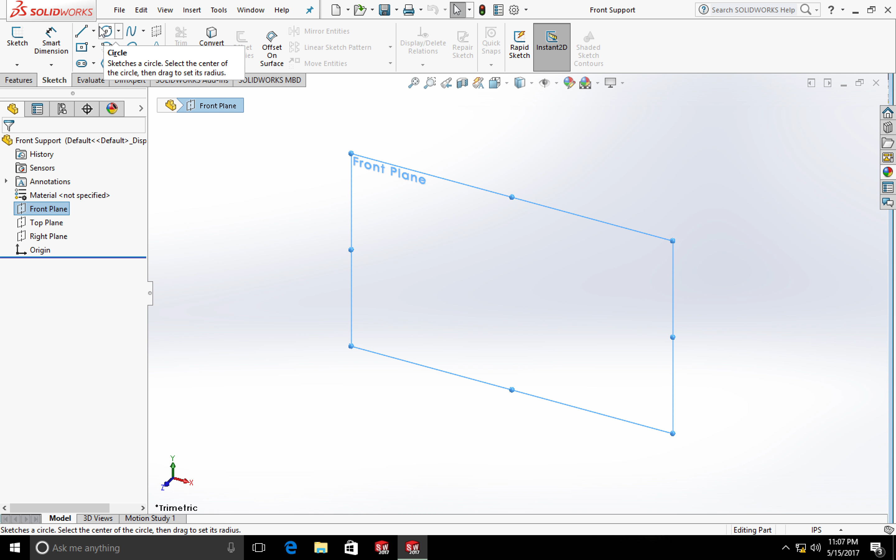So I'm going to go to Sketch. I'm going to make a center line. Now, part of great design is actually laziness. Now, I myself am a very lazy person, meaning that if I can get away with only doing something once instead of twice, I will do it. I will take a shortcut every time. So we're going to go ahead and do that just now.

Let's see here. Now, I'm not going to look at that. Well, bear with me. My scroll wheel acts differently on this computer than something I am accustomed to, and it has a tendency to run my way. So don't get too mad at me, it's just my scroll wheel acting up. All right, we're going to create that basic frame.

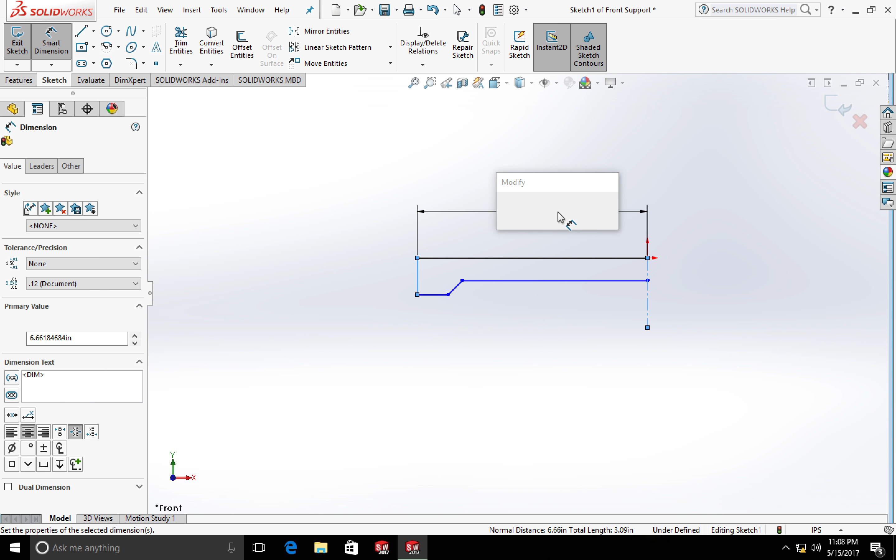Now what we're looking at right here is basically the front of the machine. We decided that with this machine we're going to have approximately a 2 foot by 2 foot cutting area. So I think for an early estimate, we're going to shoot for 32 inches total. Now, we're only building half of it right now, so we're actually going to go 32 divided by 2. And boom, there we have 16 inches.

I'm envisioning this being about, whoops, that's not, there we go, about probably 4 inches high. Yeah, it's just about right. We're having a little step up right here, no real reason for it, but let's go about 1 point... well, nah, I changed my mind a lot. We're going to go down to 1 right here.

Let's say about 4 inches right there. And that's fine. And then let's just go ahead and make this a 45-degree angle. Oop, it's balking at me there. There we go.

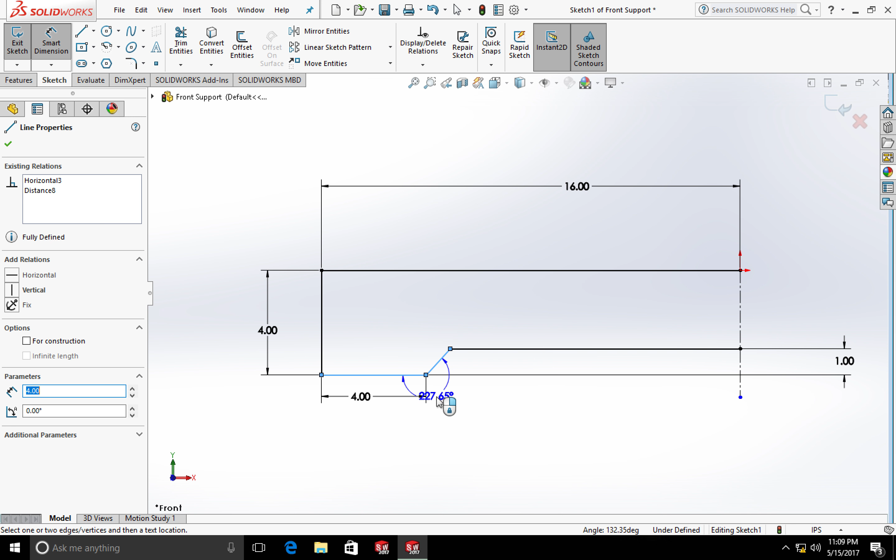Now I gotta do math. What is that? Okay, watch Alex. 120 degrees, is that right? Is that your 45? No, that's not it. It's 135, is it? Gosh, I'm getting rusty at this. Yeah, it's gotta be 135, I think. See, Alex is starting to look at me like I don't know basic angles. What do you know? Well, that's a valid point.

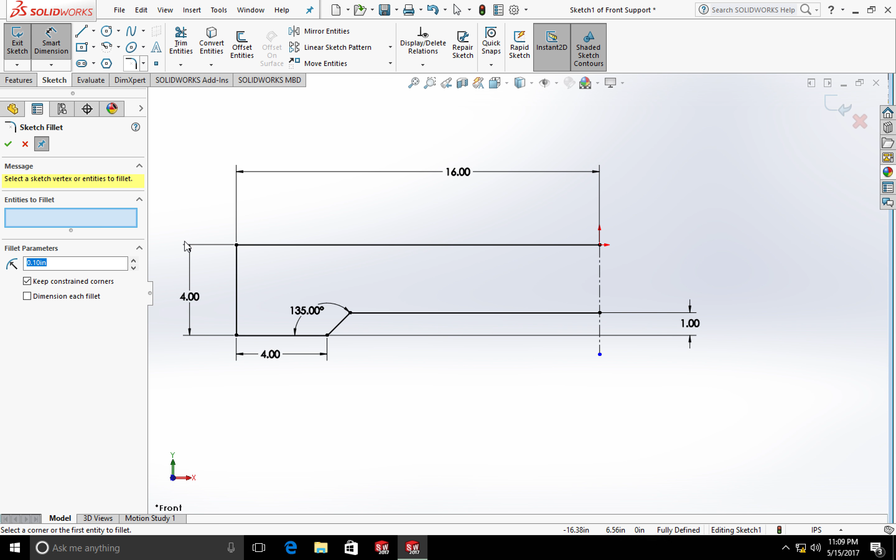Okay, anyways, there we are. This is now, keep in mind, only half the picture. Now this is completely unnecessary, but I like doing sketch fillets. I like to have a nice rounded kind of view on things, so we're going to put a half-inch fillet there and kind of make it look pretty. What can I say? I like the finer things in life.

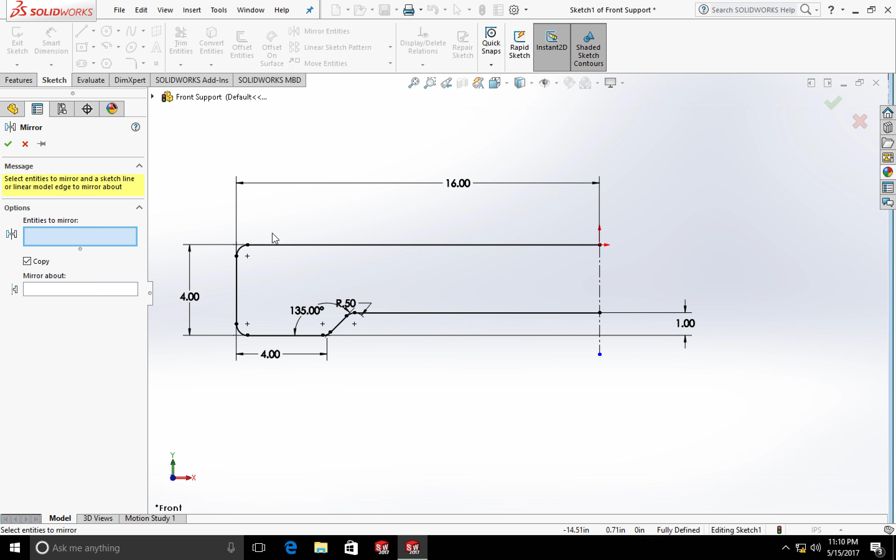All right, there is that. Now, if you remember earlier when I said I was lazy, I am. So we're going to go ahead and just copy things over. Let's make sure we get everything, and we're going to mirror it right like that. And guess what? We have our other half now. There we have our basic shape.

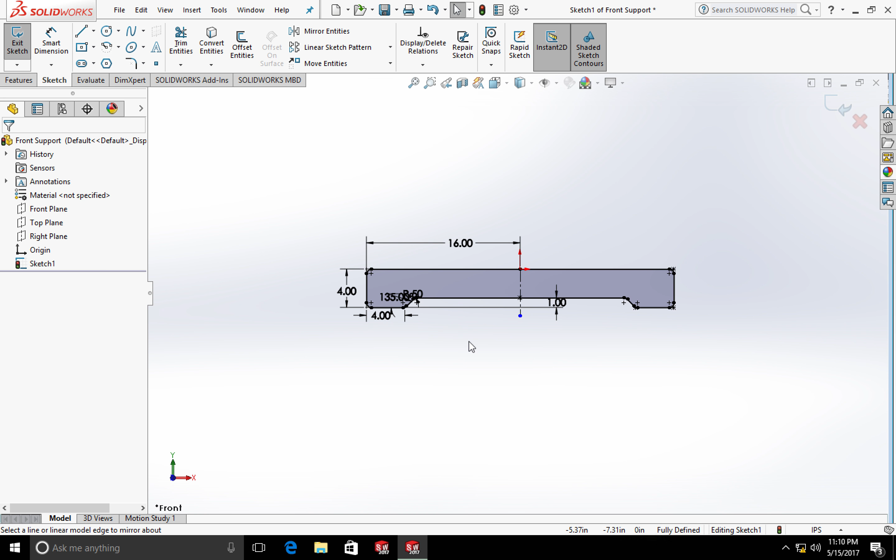There goes my scroll wheel again. We're going to exit this sketch. And guess what, there we have it. Oh no, is it true? Oh, there we go, my middle scroll wheel, my click and rotate wasn't working, and that was very distressing to me.

Okay, so we got that shape, and now we're going to go to feature, and we are going to extrude. We are going to extrude 3/4 of an inch, 0.75, and hit enter. And there is our official first part of our CNC. Aren't you excited? Isn't this great?

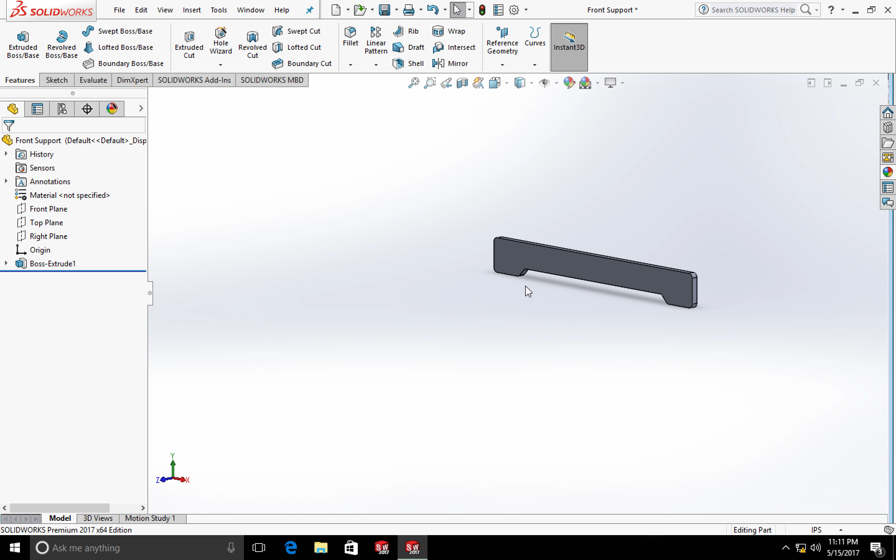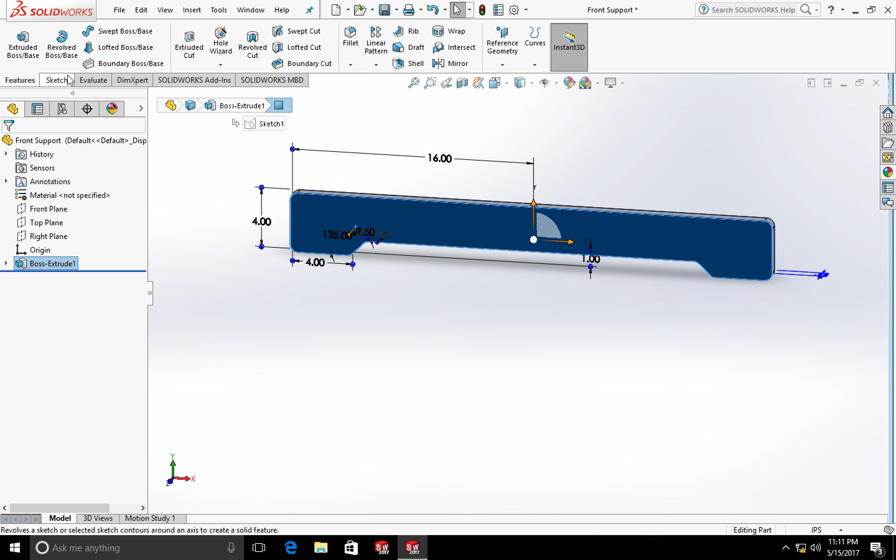Now, obviously, this part's not going to stay like this forever. Right now this has a long way to go, but that's okay. We're going to click here, go to features, and we're going to do our hole wizard. Now, where did that little thing get off to? Hole wizard, there it is, right there.

Now, I believe 80/20 - let's go back and look at our 80/20 right here. And the flavor that we're going to use is the 30/30. Let's see here, yep, 30/30. I'm going to wait for my slow internet to come. There we go, here we go.

If we look right here, we can actually get our dimensions right off of it, and I always forget these. So looks like our center spacing on these guys right here is 1.5, and if memory serves me right, these holes right here are immediately ready for a 3/8 tap. I believe that's what it is. I think it's bigger than a 1/4 inch. I think it's a 3/8 inch tap.

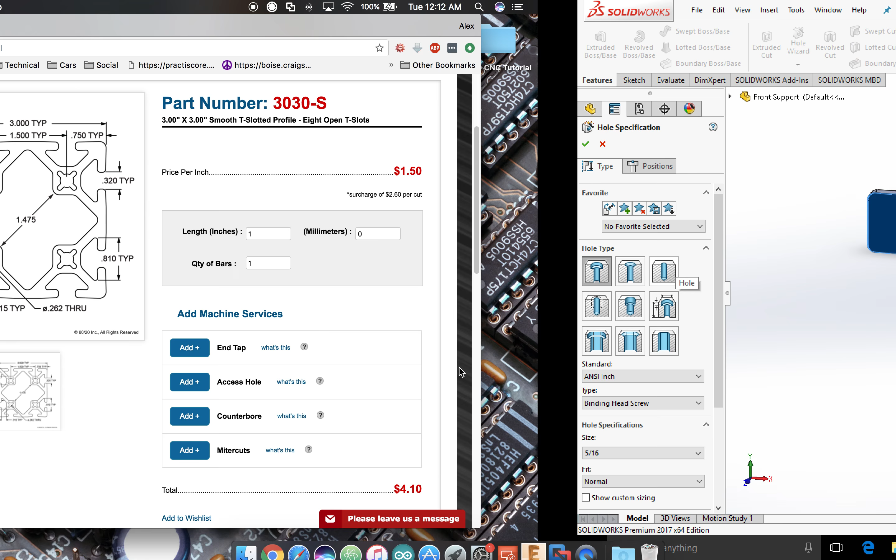So let's go ahead and make that. Okay, I was trying to remember those. That extrusion is 3x3. We're going to scroll here a little bit. So no, is it 5/16? No, 5/16, not 3/8, 5/16. Yeah, 5/16, my bad, my bad.

Okay, we're going to do a little bit of a loose fit on this one just because we want a little bit of wiggle room. I don't think we're going to need it, but just in case, if you disagree with me, you can write me some nasty hate mail. And we're going to do 1, 2, 3, and 4 of these things.

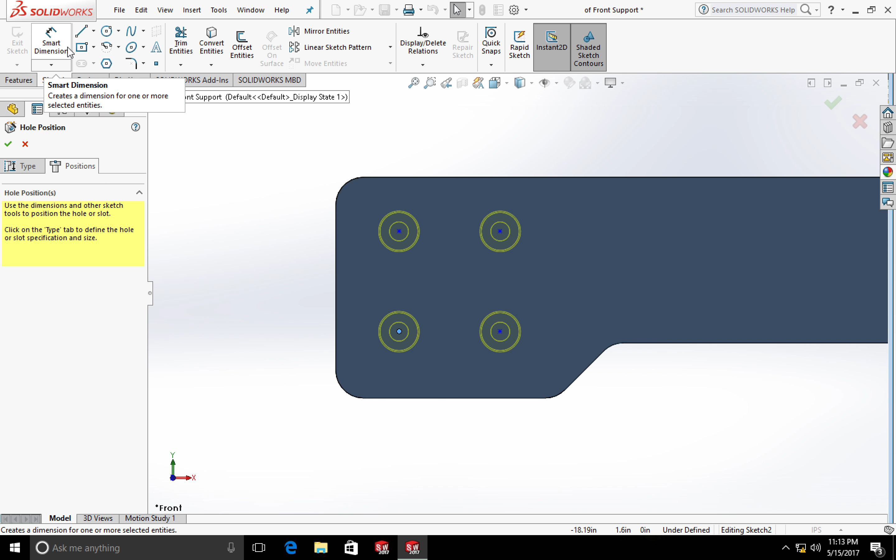Okay, let's do our front view, and we're going to zoom in a little bit. And we're going to set up some relations here. Okay, those are horizontal. These are horizontal. These are vertical. And these are vertical.

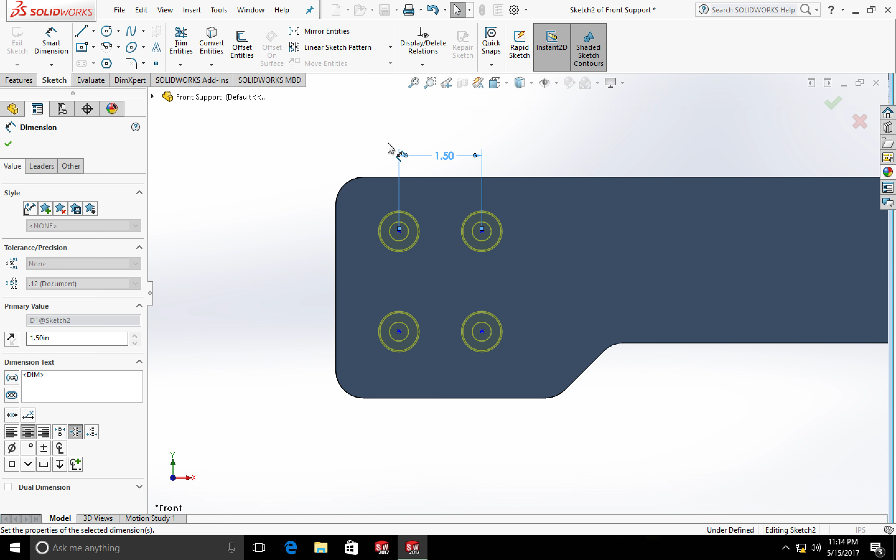Now we're going to dimension these 1.5 inches and 1.5 inches. Okay. Now we want the center of this all to be 1.5 inches from the top. Now if that's so, actually I think we can just cheat a little bit, and I believe that if we just make that 3/4 of an inch, we're going to come out okay.

Because if it's 1.5 right there, that means 3/4 in the middle. So we want it 1.5 from the top. So yeah, that should be just fine. So what that's going to do is put the top of the 80/20 right there. And likewise, I think what we want to do is put the 80/20 right there as well. Now I'm already seeing a problem with this. Okay, I forgot about that.

So we're going to move that to about 2 inches, I think, and you'll see why in a bit. We're going to have to put our screw coming out of here too, so I think we're going to need about 2 inches right there. We'll see, we might be wrong, or in fact I guarantee we'll have to change that dimension later, but for now that'll work just fine. So if we go ahead and hit OK there...

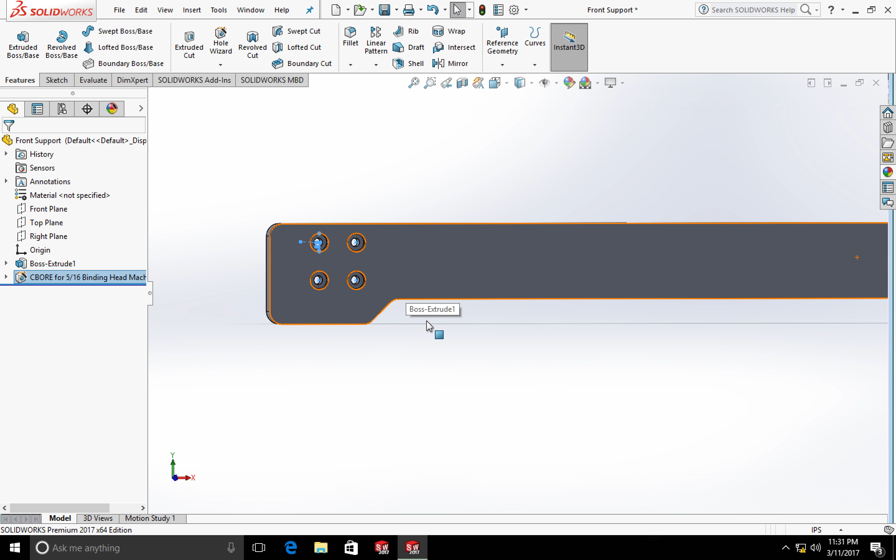There we go, we have our holes there. The hole wizard, wonderful. And oops, you know what, I forgot something, I'm gonna have to go back at that. I only did half of it because remember I'm lazy and I don't like doing things over and over again.

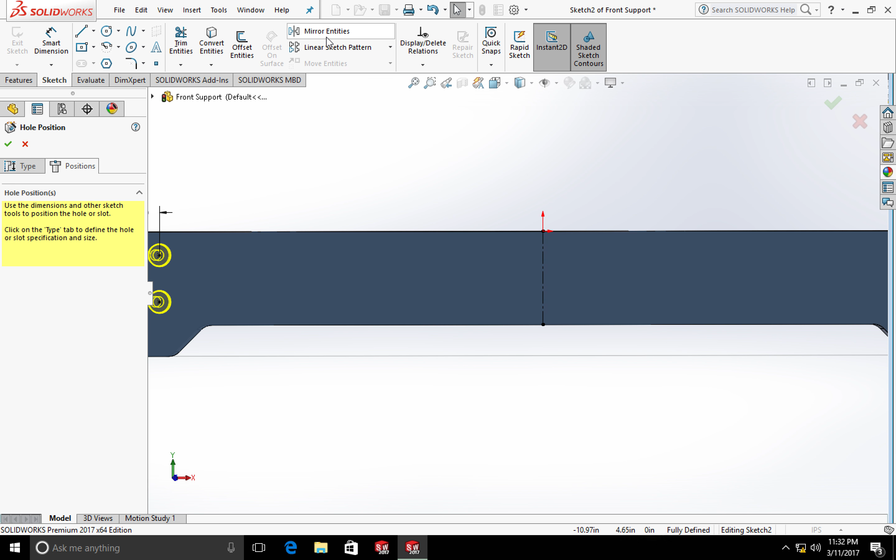I'm just gonna add a center line in here, and then I'm gonna go mirror entities, and just say what are we gonna mirror? These guys, and we're gonna mirror it about right there. Hit OK, and guess what, just like that we have holes on both sides now. Makes it really nice to be able to just do that.

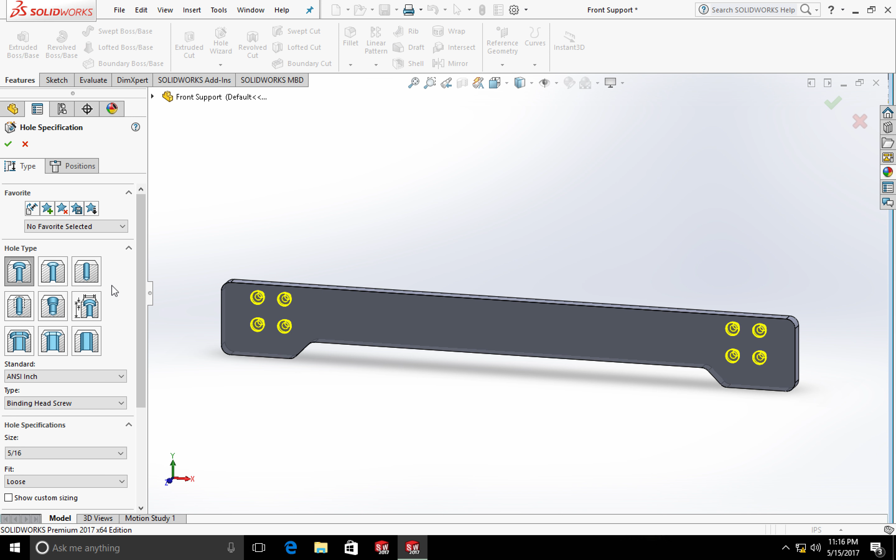So, let's say for whatever reason I come over here and decide that you know what, that's not 2 inches. Whoops, I just painted a new hole right there. Delete. Whoop. Go here, hit edit undo.

So for whatever reason, if I need to change this, let's say that we make that a 2.5 inches instead, it changes it over there too. Nope, not 25, so just 2.5. And you can see that guy over there jumps too. So if you got to edit things, you only have to edit it once, which is really nice.

I'm actually going to go ahead and leave that 2.5 here for now because we'll probably need that room over there, you'll see why in a bit. Okay, well guess what, we're going to go ahead and hit save. We have our first piece of our CNC.

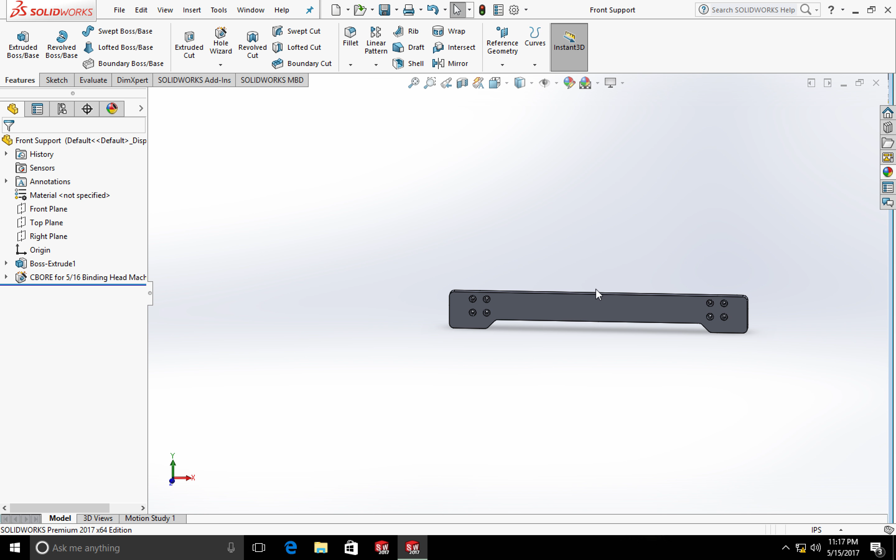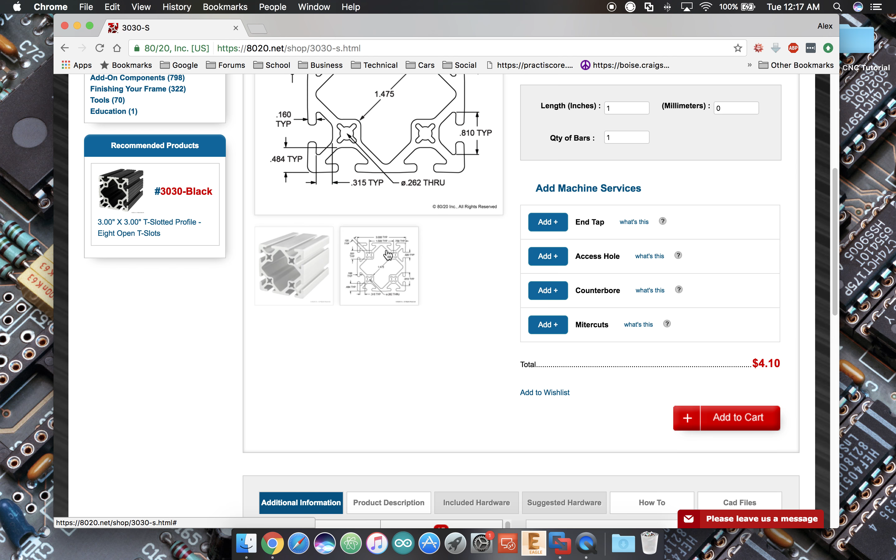Now this CNC is looking pretty sad right now. I think we're going to need to do a little bit more, and you are completely right about that. We are actually going to go ahead and add part of the frame now. Remember our frame is out of our 80/20 extrusions. Now let me ask you this, do you think we should go ahead and model this right now? Yeah, no. Do I want it in SolidWorks? Yes. Should we model that? No, right now, no. I'm going to hit CAD files, length, well, hit generate here. I don't know if it lets us do it on...

Please log in to enable download. Okay, it looks like, I wasn't planning on downloading it from this website, but it looks like you can download it right off of the 80/20 website, which is really cool. I don't know if I have a login for this, to be honest. I don't. Okay, sorry for the delay.

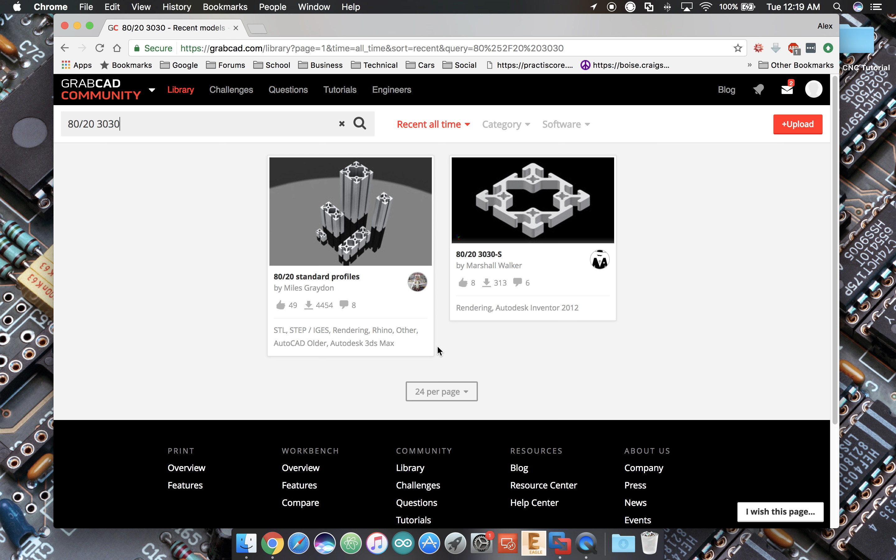We're going to go over to GrabCAD. There we go. Okay, and I'm already logged in, looks like it. And I'm going to type in 8020 3030. And let's see if we can get, you know what, I lied again, we're not going to get this from GrabCAD.

We're going to get it from 3D Content Central. And 3D Content Central is actually SolidWorks only, so they only do SolidWorks type stuff. So we're going to do 8020 3030. My main point is I've just shown you 3 different places where you can get stuff, and that don't model something if you don't have to. It's very easy to go and get a lot of this stuff right from the website.

Let's see here, so I'm going to configure and download. Okay, looks like login. Okay, now you know my email address. Please do not email me. Just don't.

Let's go and do a custom length here, and let's say 32 inches. There we go. All right, and we're going to download the 3030. And if I click on that, yeah, it is going to open it right here for us.

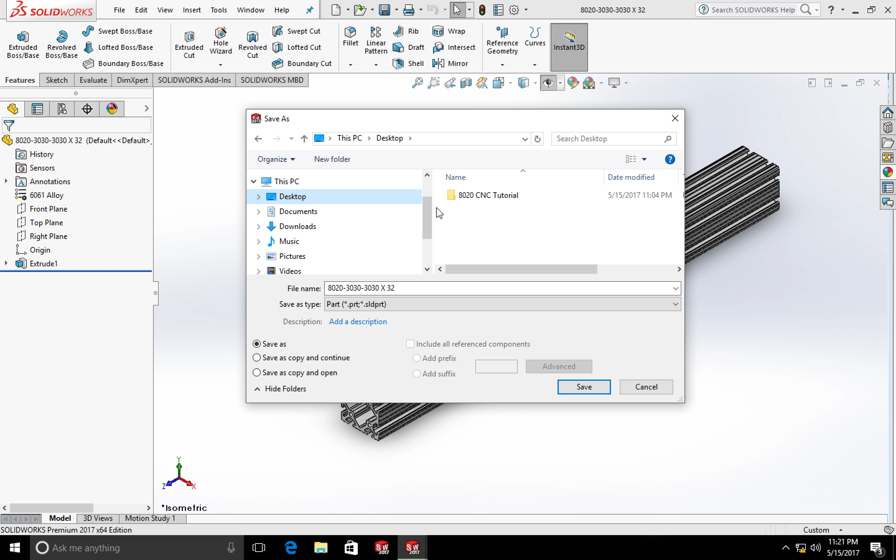What I am actually going to do is go to File, Save As, and it's in our Downloads folder, but I'm just going to go ahead and save a copy into our work folder right here, just to make it simple, because we might want to reference it later. So there we go, we have it in there.

All right, so we have our 8020, I'll go ahead and close that. We have our front support. It's time to start putting stuff together, so we're going to go to New, and this time we're going to create an assembly.

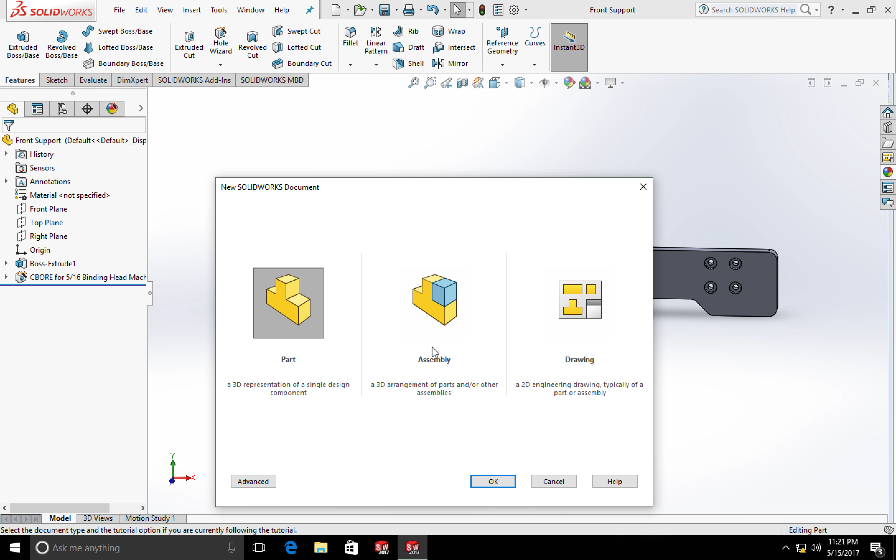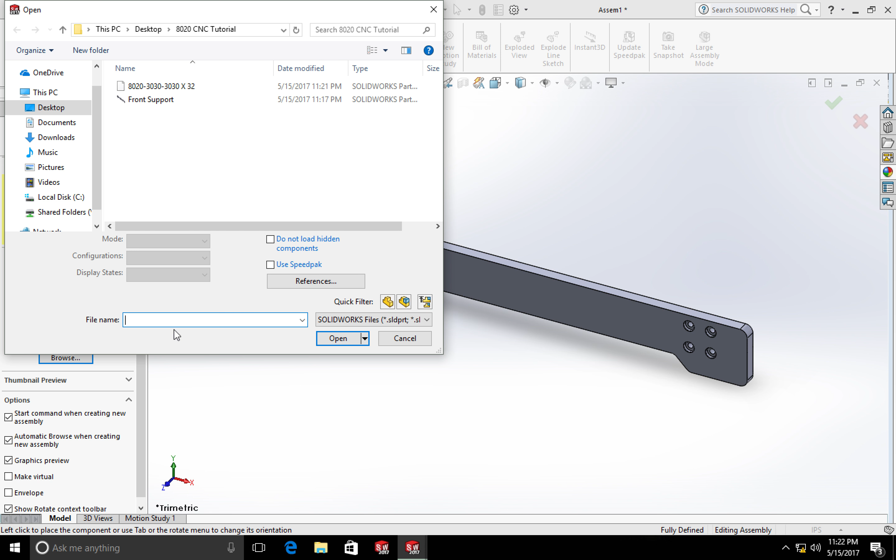Okay, now it's blank again, so we're going to take our front support and put that in there. Now we're going to insert, browse, and put our piece of 3030 in there. Boom, just like that.

Now this is the fun part. We're going to actually mate all of these together. So we're going to hit there, and we're going to mate. Whoops, my scroll button is always acting funny.

So what I did is I mated this surface right here. Oops, we don't want to do that one again, I'll clear that. To the other surface, to the opposite corner over there.

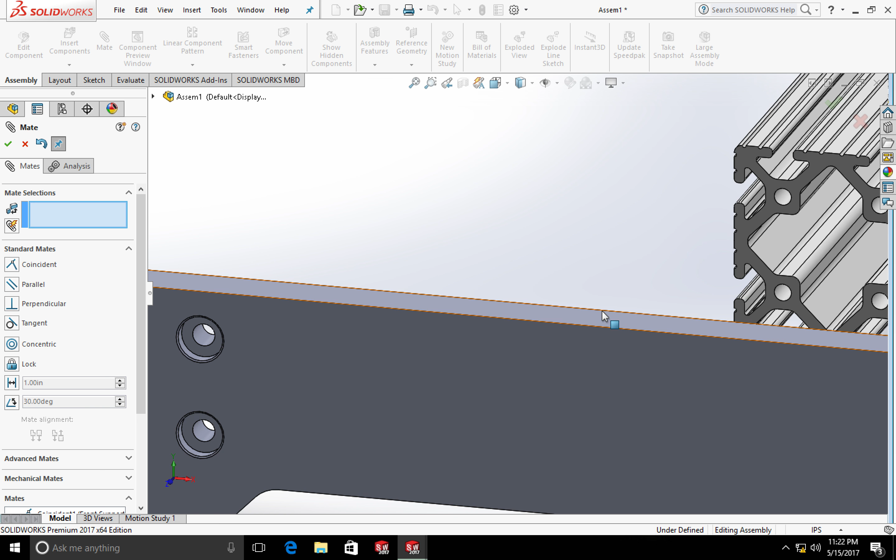Now what we're going to do is actually do our mates the same way these will be physically connected. So we'll mate that right there into that right there, and we'll mate here to here. The reason I'm doing that one is before it would rotate, but now it will not rotate.

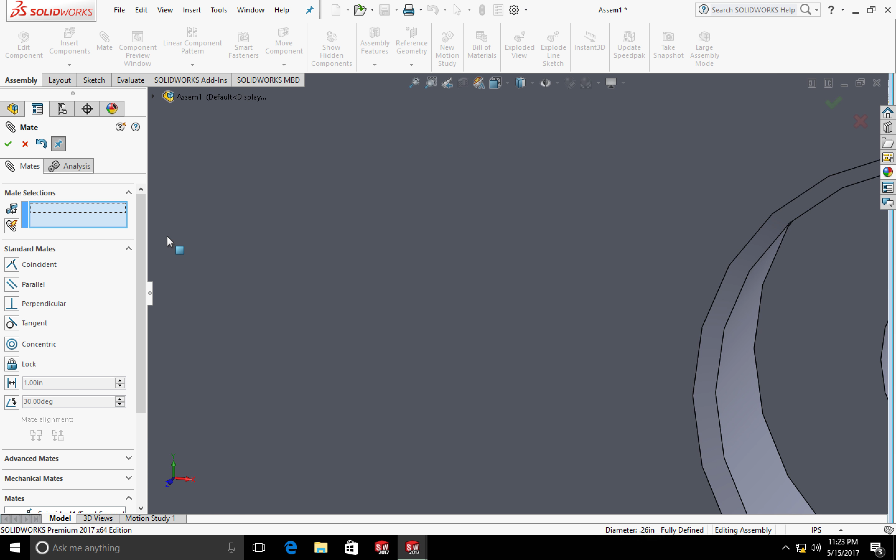And guess what? We have our first 2 pieces of our CNC put together.

I'm going to try this. If I hit Control, and no, Command, no, okay.

Well, we're just going to go ahead and insert another component, existing part, and I'm just going to browse for it again.

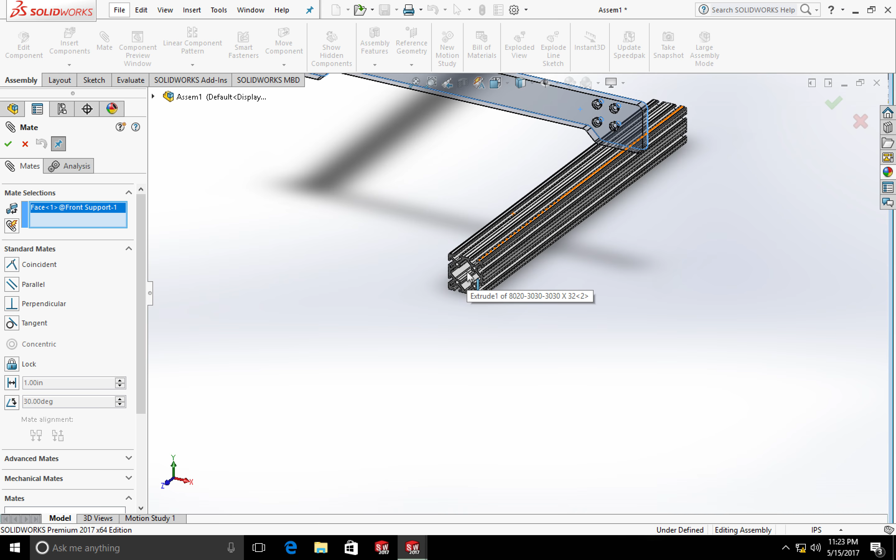Much in the same way, we're going to go ahead and mate these up. We're going to mate that side. Oops, oh man, that scroll wheel just likes to go and go. And that one, hit OK.

Oops, now I can't see it. There we go. Come on. We'll go ahead and just do that guy down there because we can see it, and that guy right there.

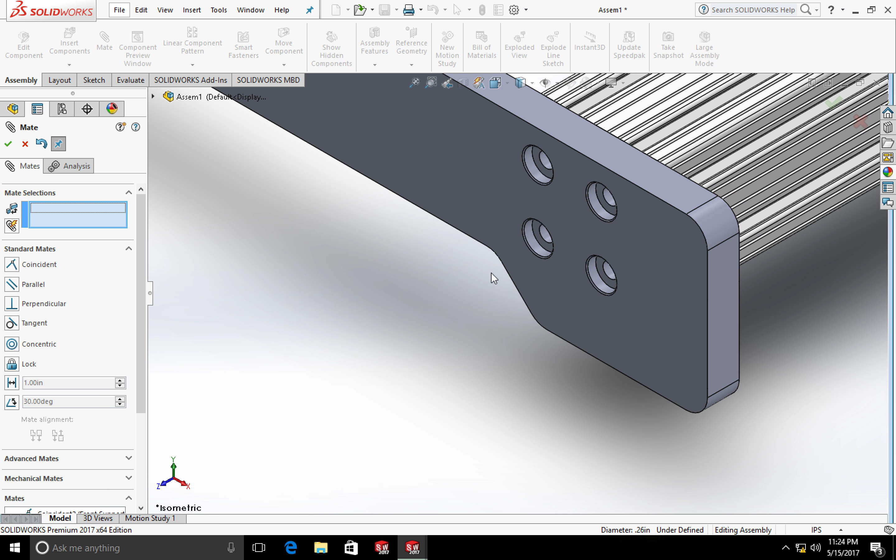Very good, I'll show you. See, right now, we can rotate. See, and that's no bueno, we don't want that.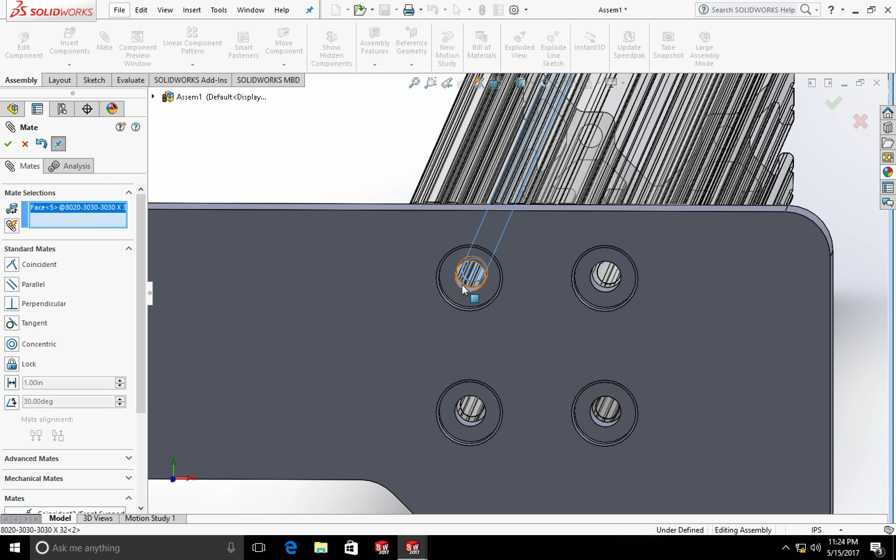So, of course, now we can't. Now I can't see it. Let's see here, get it right, kind of close. There we go. And it'll rotate just ever so slightly.

Okay, so with no mate selections in here, if I just hit OK, it'll go ahead and just tell it that we're done with the matings.

Now, to keep my parts count low, you'll see here in a minute, you could put 80-20 pieces right here and right here. I'm not going to, but we'll revisit that later.

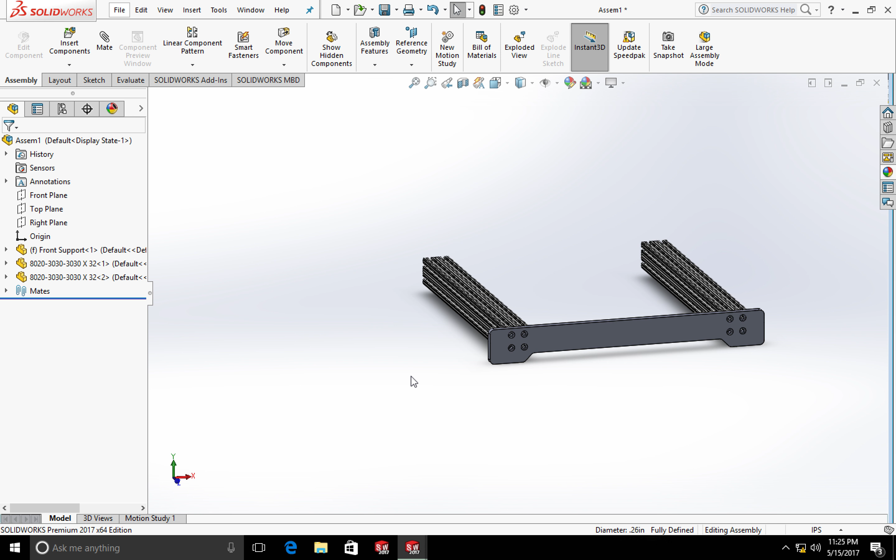But for now, let's go ahead and start talking about our back piece. Our back piece is going to have to be very similar to our front piece. So similar, in fact, that I think we're going to cheat a little bit here. I think what we're going to do is not create a new piece for the back, but rather do a configuration of our front support.

So our front support is really just going to be our front and back support, but we'll leave the name there just for fun. Let's go ahead and hit our configurations. Actually, wait a minute, it's been a while since I've done this, I haven't stretched these particular muscles in a while.

We're going to add a configuration. Our configuration name is going to be back. And okay.

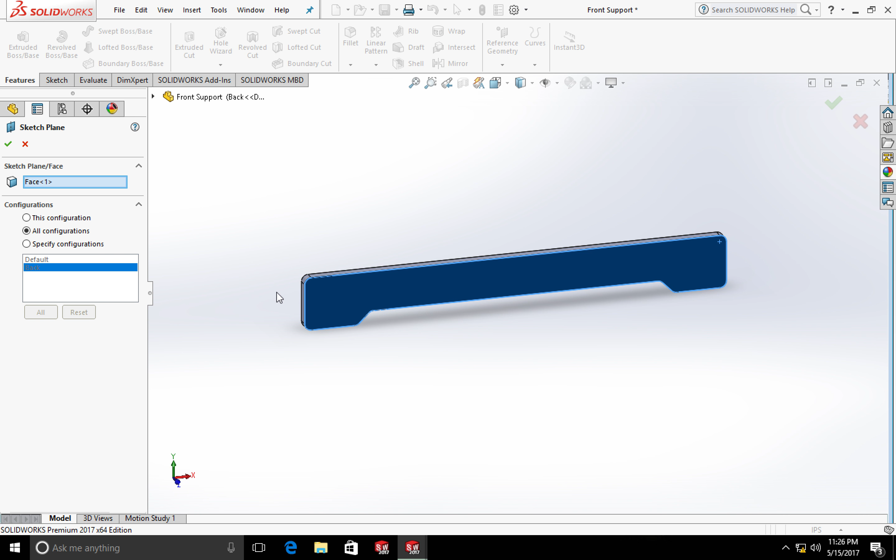Okay, so in the back, I am going to go over here and look at our counter bore, and I am going to hit Edit Sketch Plane, and flip over and select this plane instead, and hit OK. Now I believe what we've done is put our holes on the back side.

Now the cool thing is if I go back here and look at our default configuration, which is the front. Oh no, did I lie? Oh shucks, okay, let's see here. I've done this before, I promise.

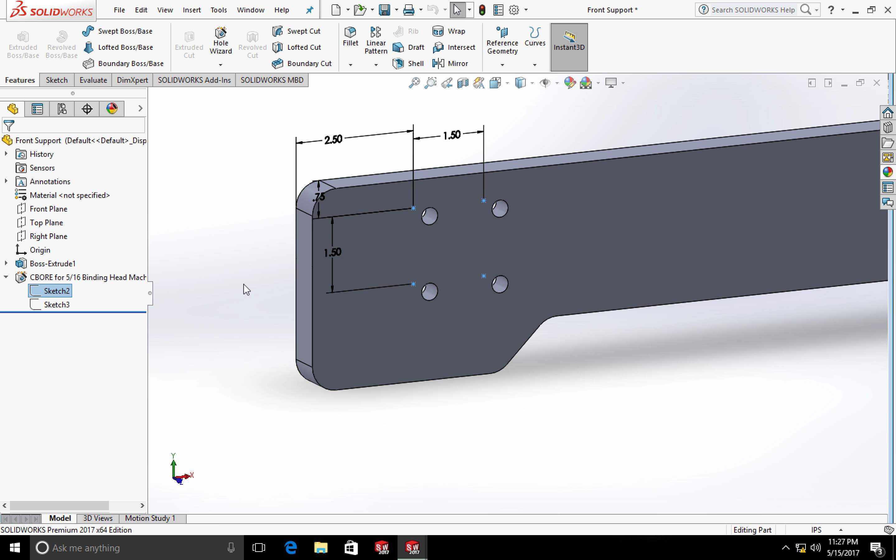Okay, specifically for this configuration, that's what I needed to do. If I hit this configuration, they are on the front. If it's the back configuration, it's now on the back. So now from now on, whenever we make changes, we can specify if it's a change for everything or just for this configuration. Super handy. So we're going to go back into our assembly.

Sorry, it takes a little bit. There we go, a little sluggish right there at first. Now we're going to go ahead, insert component, and we're going to insert the front support.

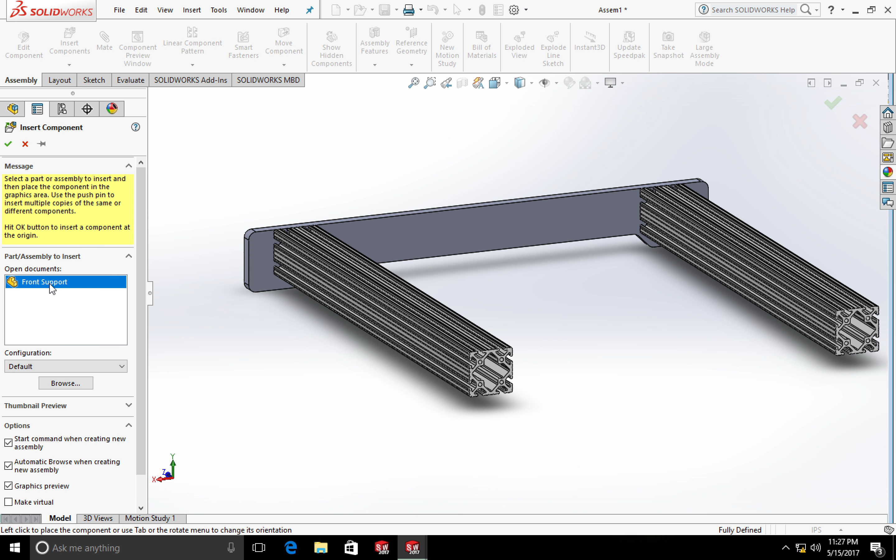But wait a minute. Okay, now could we just go ahead and switch this and swap it to where the holes were in the front, or just turn this thing 180 degrees and call it good?

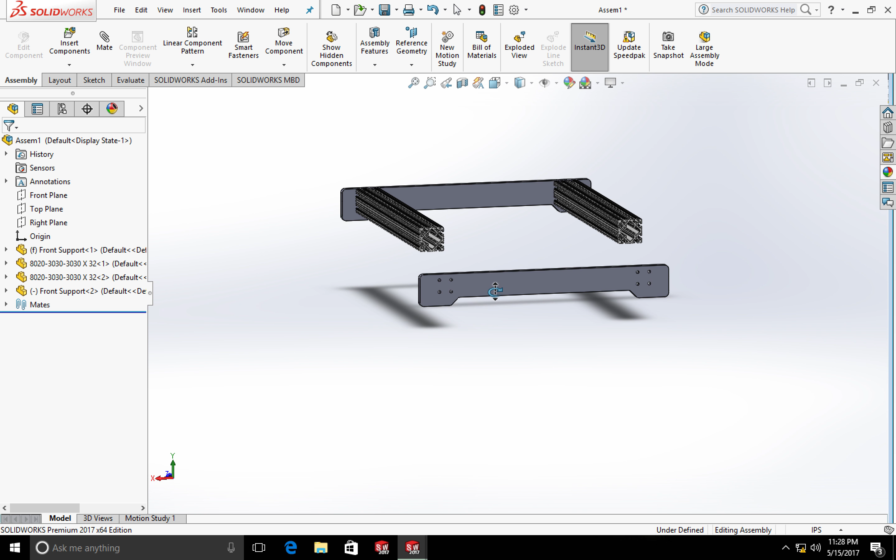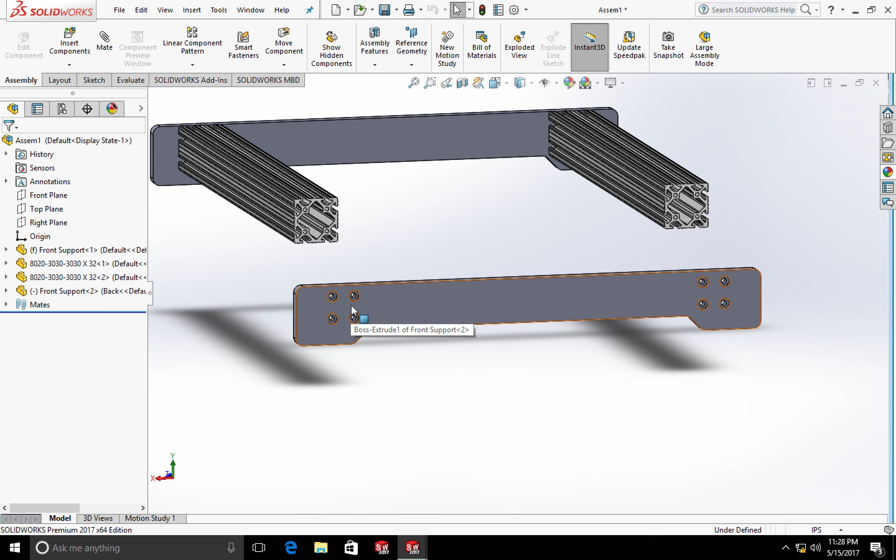Yes, we could, but that's not what we're going to do in this case. We're actually going to keep it in the same plane. I'm going to go to component properties and select the back, hit OK. And now we have our correct orientation, and we are actually looking at the back configuration. So in the future, whatever changes we make to this will carry through. That's very important. That's one thing I love about parametric modeling.

So we're going to hit mate, and we're going to rotate around. We're going to mate right there. Okay, now this one we don't have to get quite as crazy with the mates, because it'll hold in place just fine.

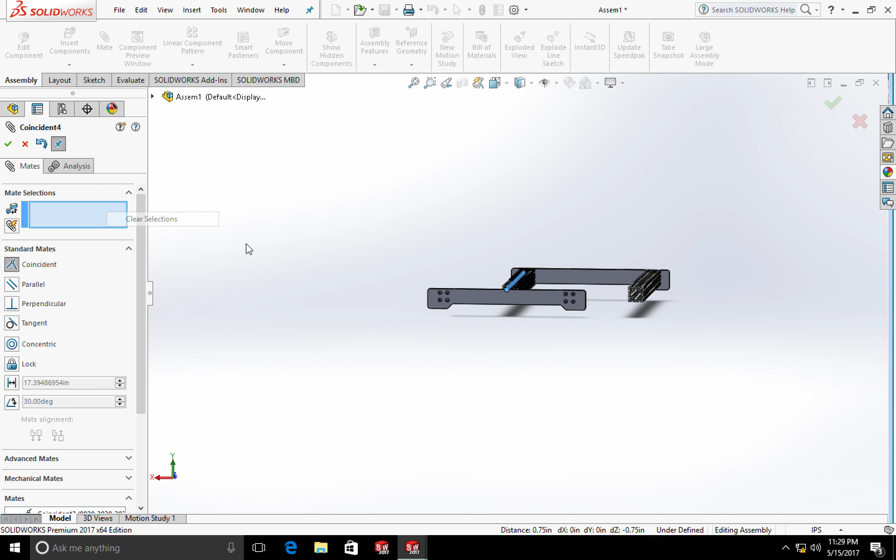Let's see here, what on earth? Nope, that's not what I want. Clear selections, I don't know what just happened. This mouse is being really funky. What on earth? You're not right in the head. I'm using my laptop here because I want to sit in my easy chair. My desktop computer does this better, but my MacBook Pro, my trusty MacBook Pro.

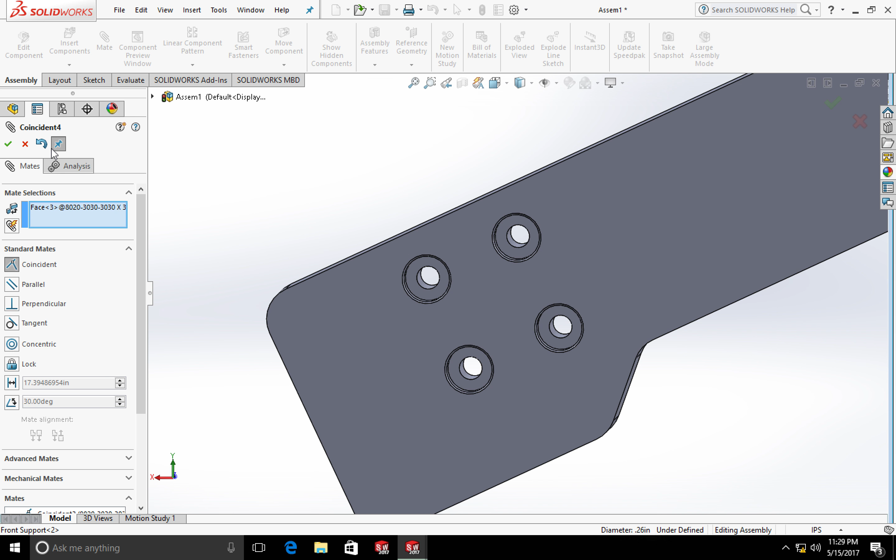Okay, it looks like I made a mate on something I should not have. The coincident right there, okay. I don't know what I did wrong. I did something wrong, I'm just going to hit delete on that guy. Okay, there we go.

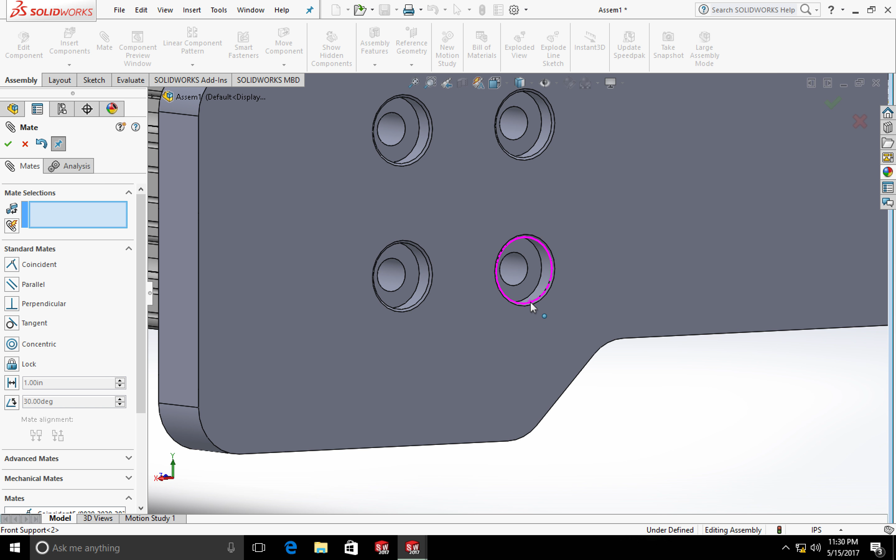So we want to make this... actually, I might have just deleted a perfectly good mate there. I don't know. Mate that guy and that guy, there we go, hit OK. We want to mate that guy, that guy, there we go. I'm not sure what I did wrong before, I did something. And then right there and right there.

Now, do I need to go over here and make my mates? Nah, there's no reason to. I could go and mate that together, but there's not any real reason to. This will be just fine the way it is. All right, well guess what? We now have the base started for a CNC.

Pretty sweet, huh? Something I do want to do is let's go ahead and put a spoil board top on it, just for the sake of making it look more complete. I like to have things kind of looking more or less finished as we go. So just for the sake of looks, let's go ahead and make one more part in this video before we stop and take a break.

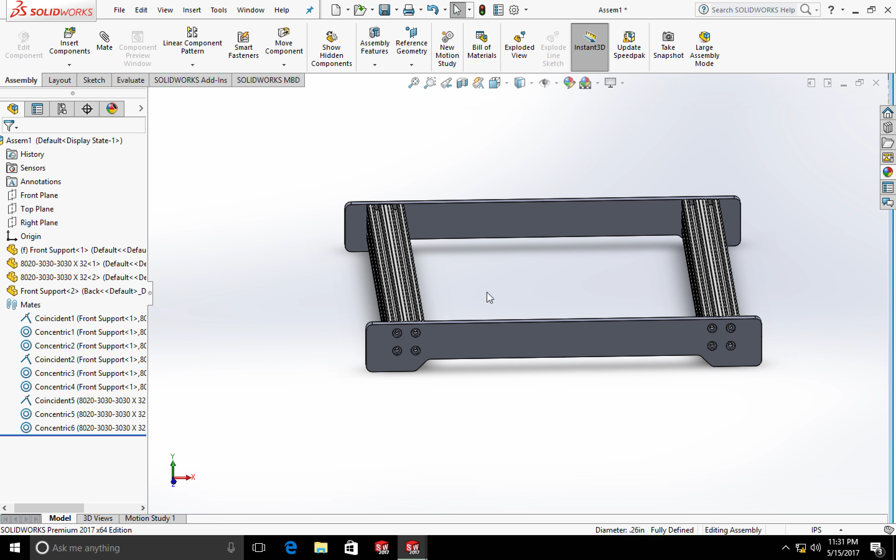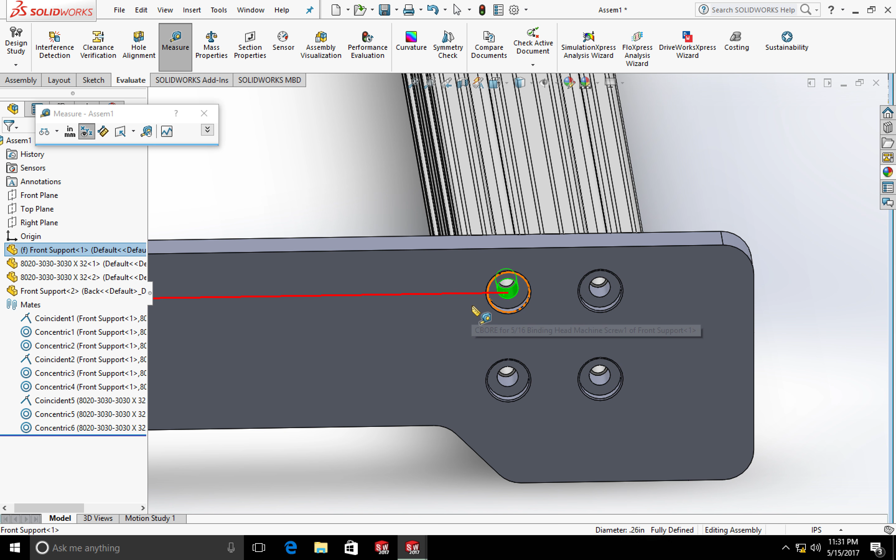So what I'm going to do is, I could do the math, but I'm lazy. So I'm just going to do an evaluation here, and say okay, well we want the spoil board to come right around here somewhere. I'm just going to use this and a little bit of deductive reasoning to find out. Okay, so that's 24 inches. So I'm thinking if I make that 24... I think a 25-inch spoil board will work just fine. And then from there to there, that's yeah, 33.5. I'm going to forget those numbers here in just a second, I guarantee it. 33.5.

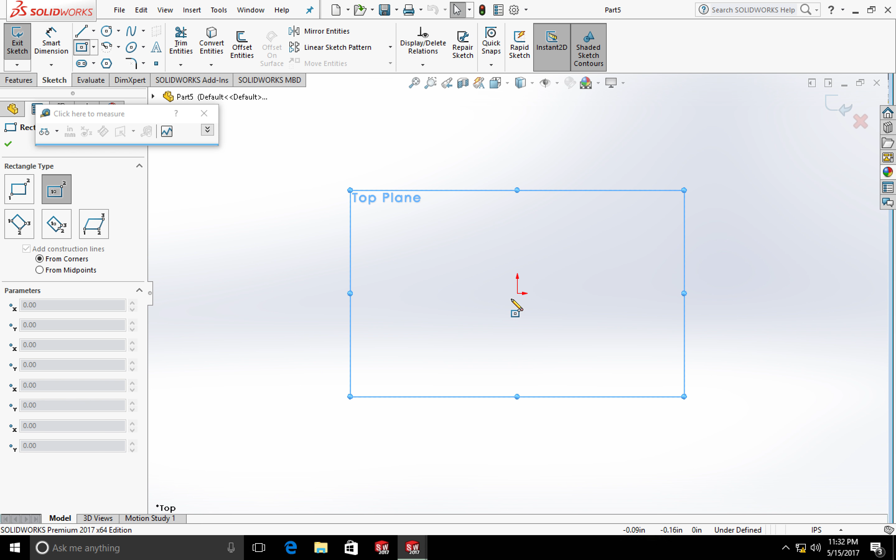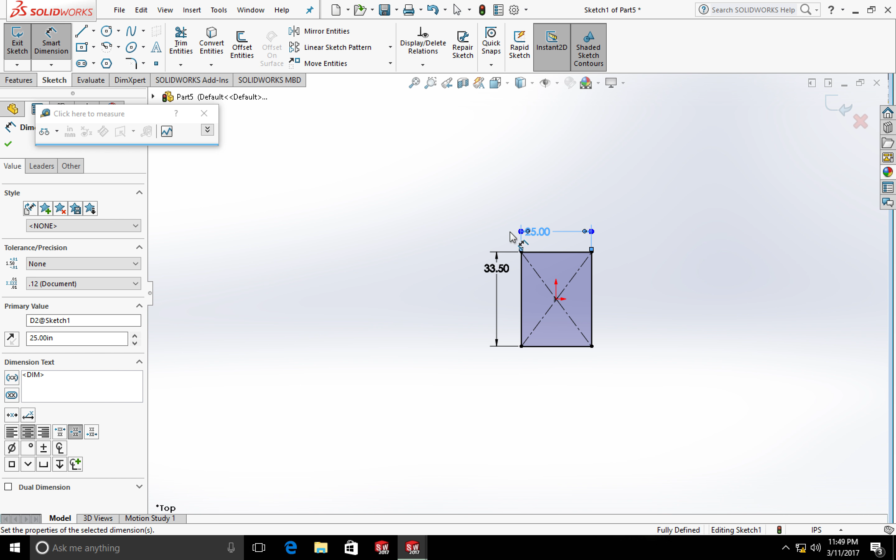We're going to do this on the top plane, we're going to do a sketch. 33.5, was it? I sure hope so. And then 25, I think it was. I might be wrong about this. We'll see, that's the nice thing, is we can always change it later.

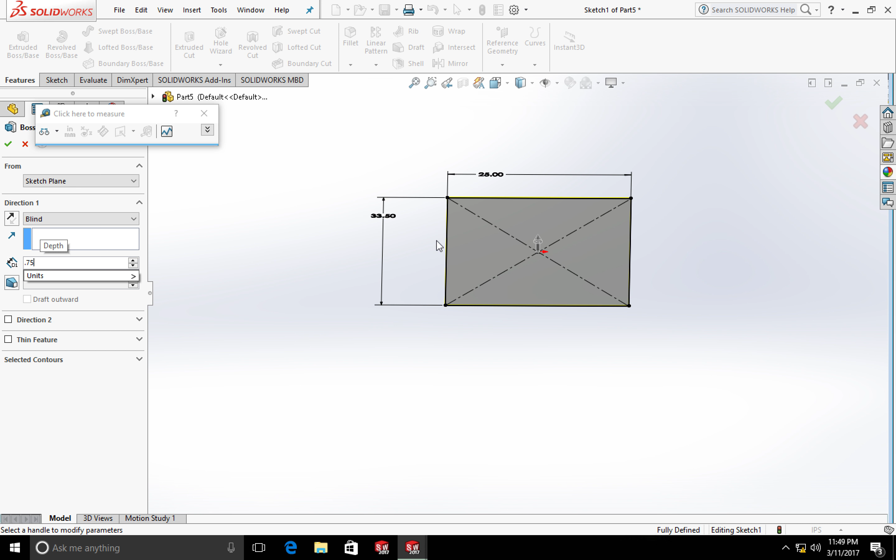Okay, this spoil board is going to be incredibly simple, or this part anyways, because this is most likely just going to be a sheet of MDF right there. And you know what, I'm a sucker for flare, so there's no real reason for me to do this really, other than I want to, and you can't stop me. So I'm going to put a quarter-inch flare on the chamfer on the top of it just to make it look good.

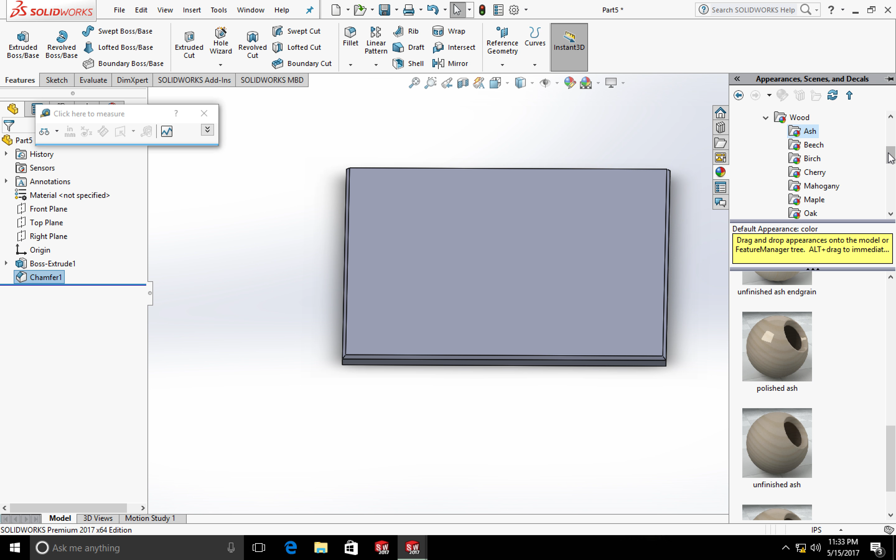And then I'm going to go into appearances, let's see, I think it's under organics, woods, and I'm going to pick a nice wood for the top of this. I don't know that you'd actually want to use a wood on it, but let's just try a satin finished oak. Yeah, isn't that pretty? Okay, no reason for this at all, no real reason other than I want to. And we're going to save this as spoil board.

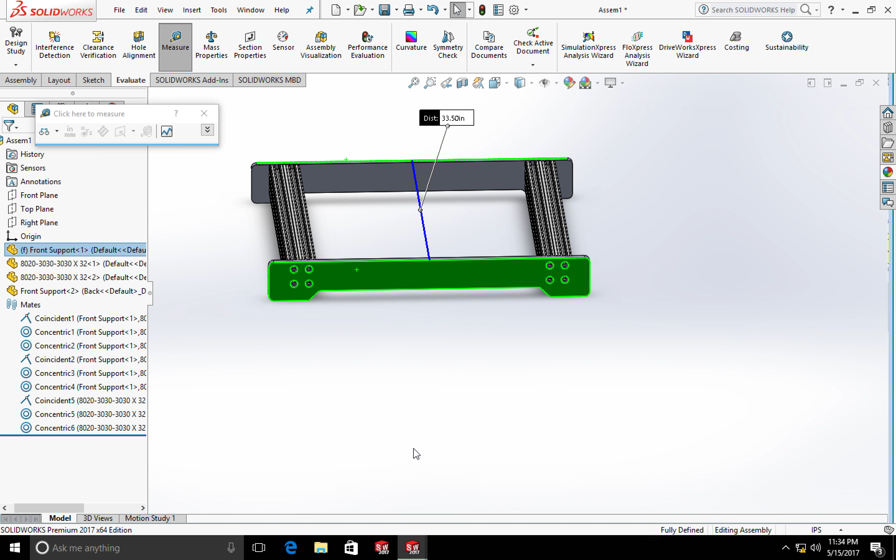Bingo. Now I'm going to show you a little trick I like to use. We're going to go and insert a component, existing part, spoil board.

Okay, I still don't know if I got my dimension right. Well first off, my scroll wheel's bugging me again. I'm going to mate the bottom to the top.

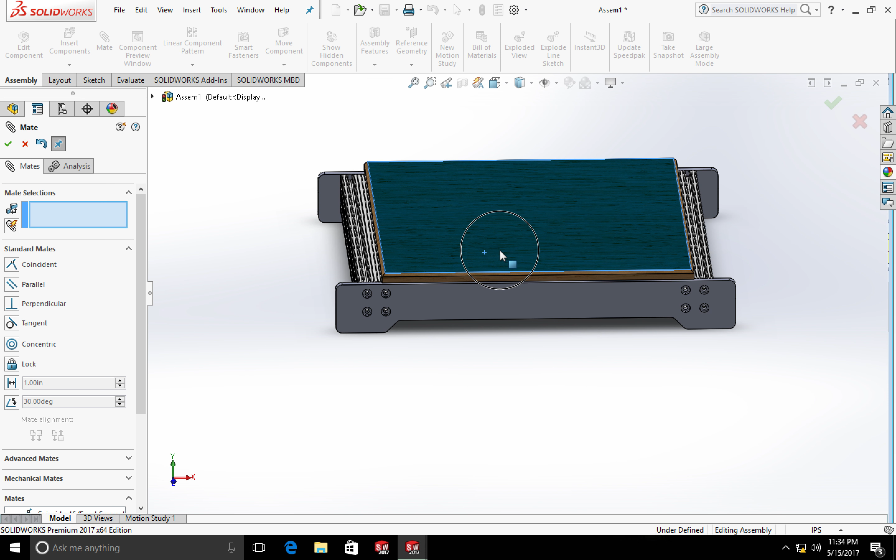Ideally, what I want to do is attach that spoil board into the top there. So I'm going to go ahead and mate the front of this to right there.

And so did I get my, sorry this is jumping around. I hope this isn't making you sick or something. Okay, yeah, I got that right then.

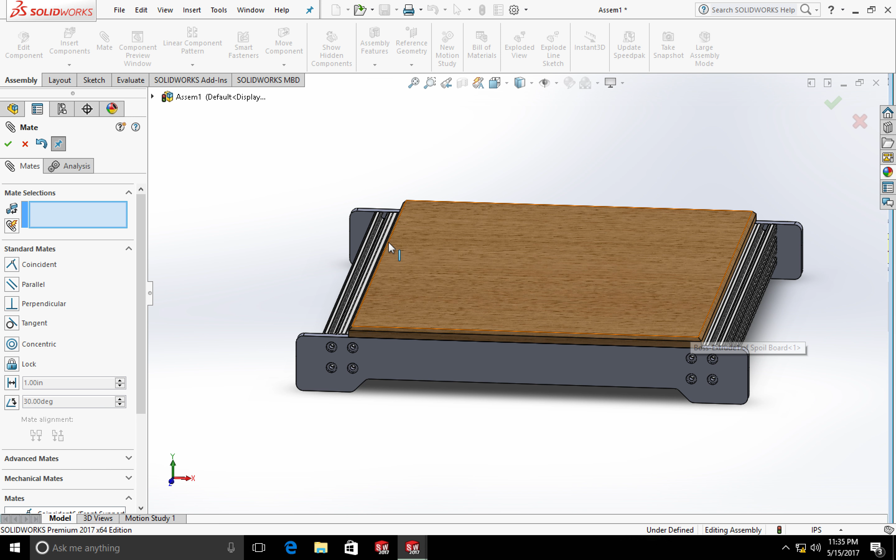Now I want this to actually mount in, be able to mount into the track. So I'm going to put some holes in the top, actually here's what I'm going to do. But right now I think I need to make that wider. I think I want that to cover up and be able to mount into the track right there, so that needs to go to right about there.

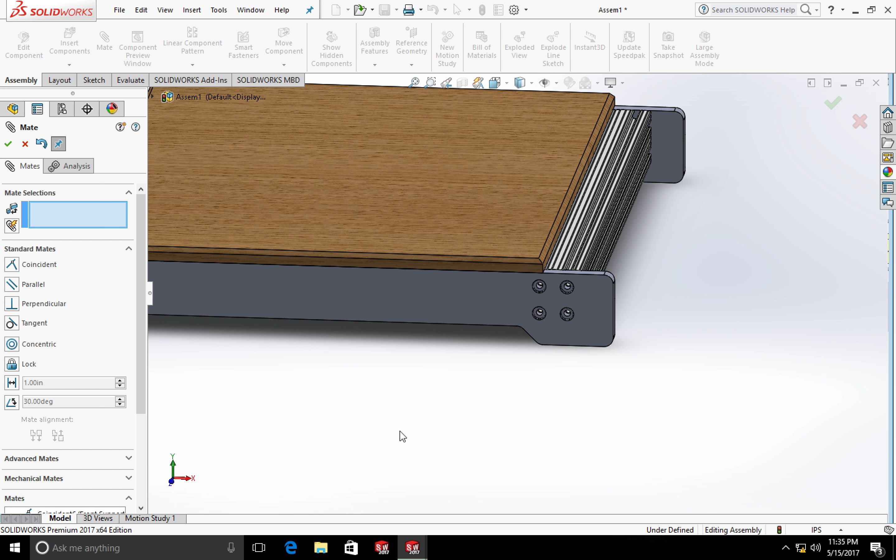And obviously right here I'm short. It looks like I'm about an inch short. So let's go ahead and go back there to our spoil board. Great thing about parametric modeling is if you make a lot of mistakes, like I make a lot of mistakes, they're easy to fix.

All right, we're going to hit the little stoplight here to rebuild. And if we go back into our assembly, yep, we'll go and rebuild the assembly. Yeah, there we go. Looks like I got it right.

So there we go. Now I'm going to show you a little trick, one of the mates that I like to use. I go into here in a mate, and I go to advanced mates.

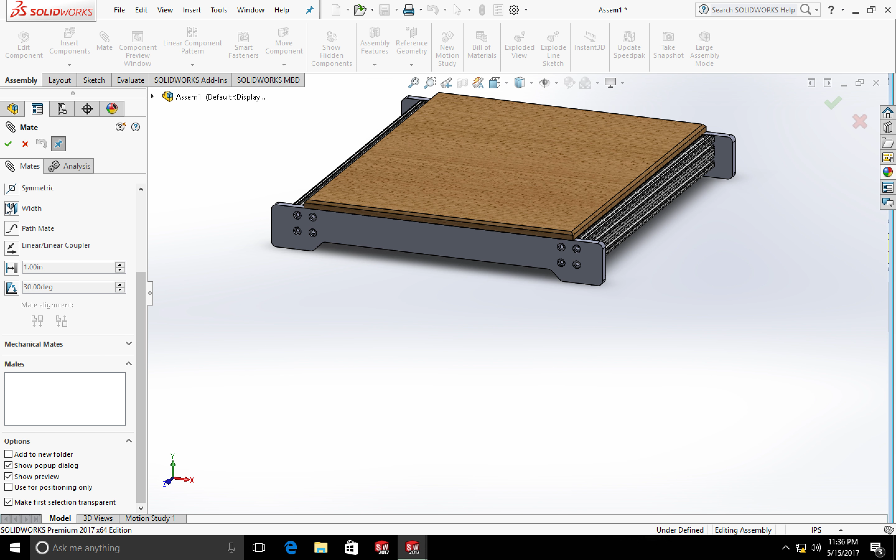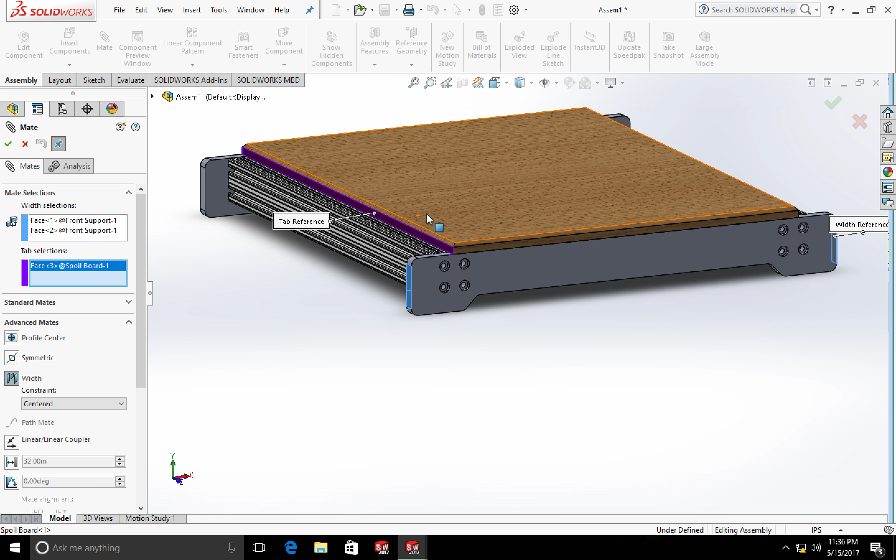There is a width mate that I like to use, and what I'm going to do is choose this width right here, and right there, as my width. In my tab selection, I'm going to choose this guy right here and this guy right here. There we go. And what that does is it centers the tab within the width, or the width in the tab. You can make either the width or the tab, it doesn't matter.

But beautiful, beautiful, look at that. Isn't that just a lovely CNC?

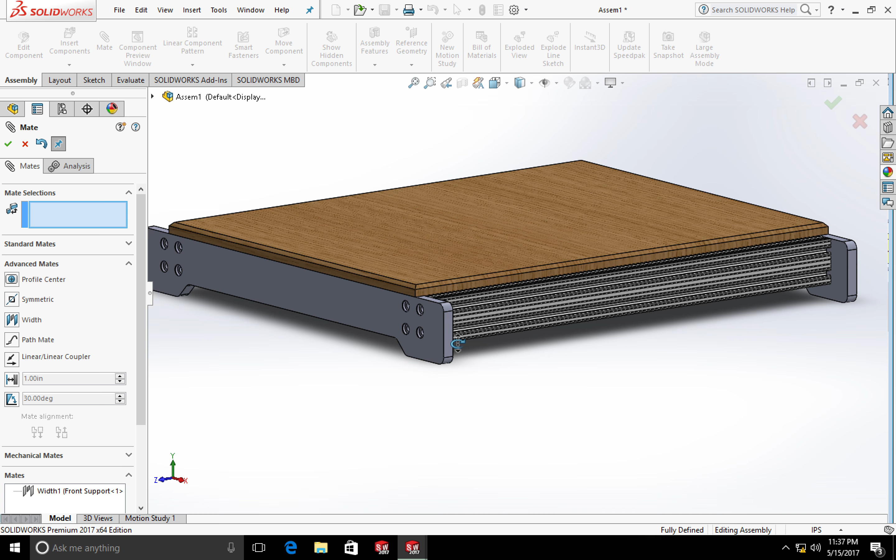Now, as said before, if you are feeling like you need some more structure, knock yourself out. You can put an 80-20 piece in there. I don't think I'm going to bother with it for now. I think it's going to be pretty good as is.

Because for one thing, okay, let's go ahead and edit our spoil board a little bit. We're going to look at it from the top here, and we're going to put our holes along the side. And what we're actually going to do is make it our spoil board. For one thing, it's replaceable, and it should easily be replaceable.

But we're going to put the holes in the top here so that we can secure it right to the 80-20 frame, and that's going to strengthen things up. That's going to create a kind of a torsion box, and make it so that if we want to remove that, then we can. So let's go ahead and do our hole wizard again.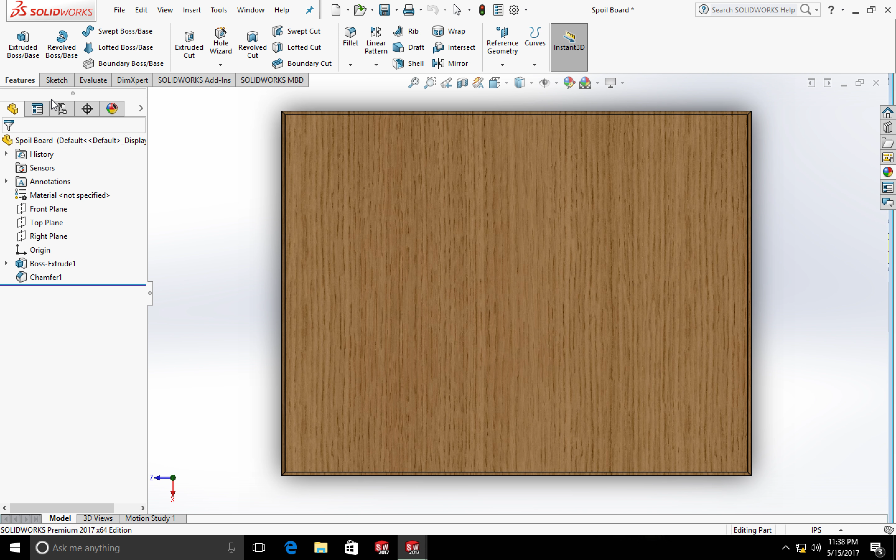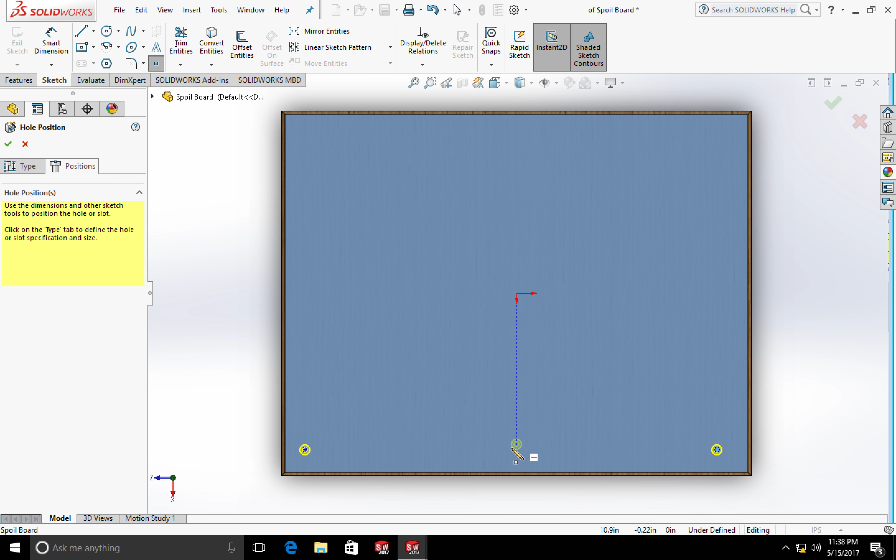So hole wizard. Now we're going to go ahead, and looks like we still got our 5/16, and that counter bore works just fine for me, so we'll go ahead and stick with that. And we're going to go, let's see here. Actually, you know what? Not yet.

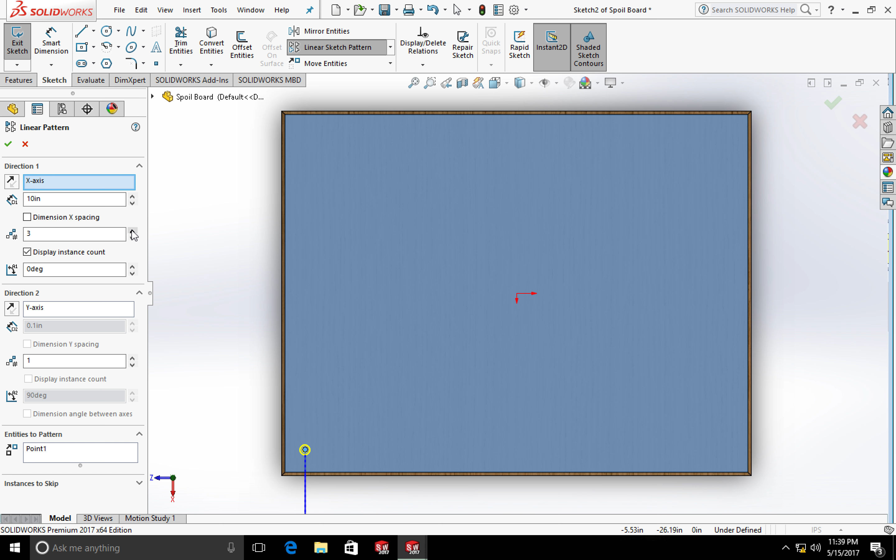Control Z. We're going to do a linear pattern on this, a linear sketch pattern. Direction 1 is the x-axis. And we're going to put this every, oh boy, let's say 10 inches. Actually, I'll probably regret that. We'll change it here. But you know what, we're going to do 4 holes. Whoops, not the x-axis, we want that to be the y-axis.

Now we want the distance from the side. I believe that should have been 3/4 of an inch from the side. I might be wrong, like I said, I'm not running off notes here or anything like that. I'm just now...

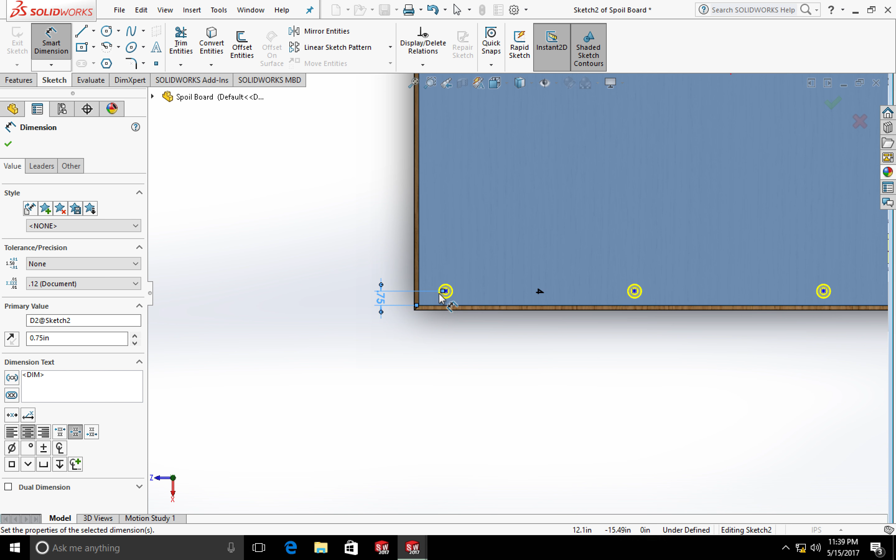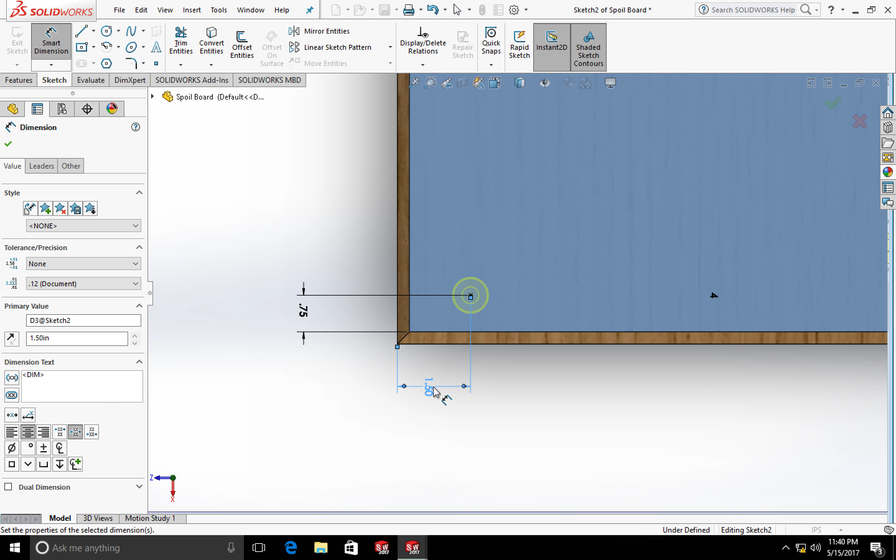I'm going to do a little bit of a sin here... well no, I'll go ahead and dimension off the side. My recording bogs down my system just a little bit, so my recording software, I'm not quite as snappy as I normally am in SolidWorks, but I gotta say this computer does pretty well. Okay, call that good.

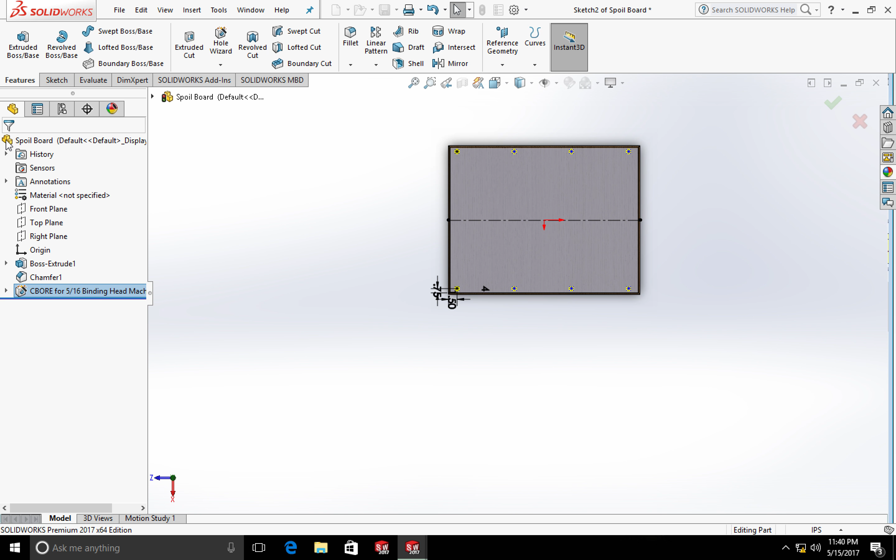But once again, looks like I got ahead of myself, so I forgot to mirror it on the other side. So on my positions, I'm going to draw a center line from here to there. And then I'm going to do a mirror entities, entities to mirror are right there. We're going to mirror about that center line. And just like that, so now if I'm wrong about something, I can go back and change that really easily. But no, we're not going to show that again. Okay.

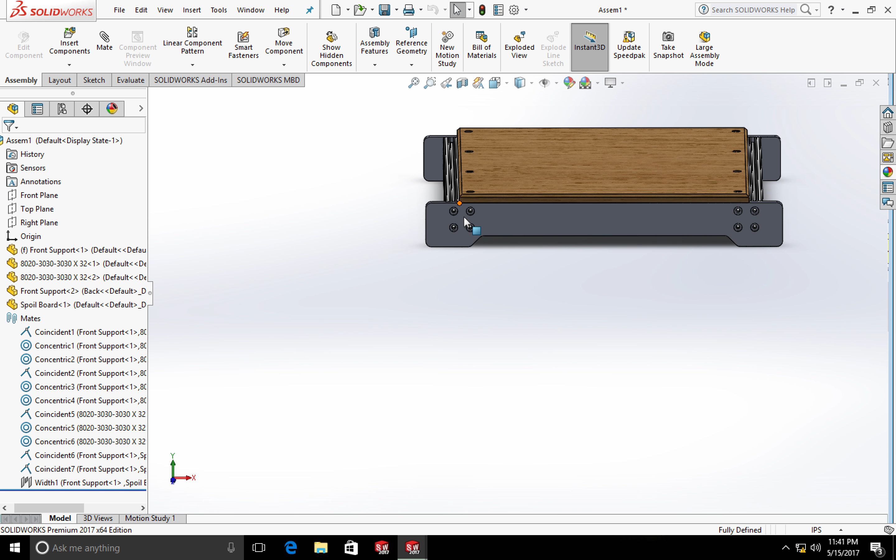Okay, now if I thought things through correctly, yes I did. Those line up, so that slot lines up with that hole. So all we got to do is put a little T-nut in there now, and our base attaches really nicely to the CNC. Now, I'm thinking ahead right here.

I think that this is going to be narrower than I think we're going to have to make. I think that's 4 inches right now. I think for the sake of fitting some stuff in there, I think we're going to have to make it a little bit bigger. So let's go ahead and do that right now.

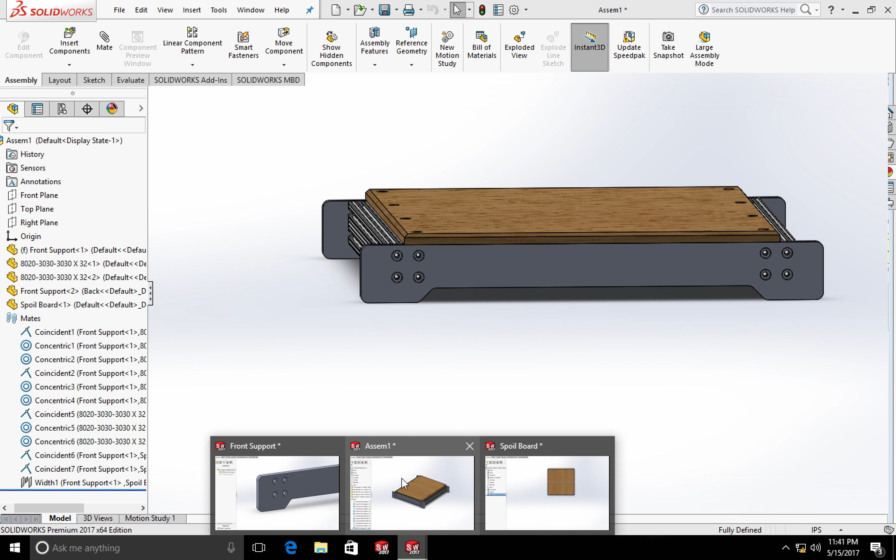As I said before, I'm not working off any notes here, I'm just kind of going as I go. I'm going to go ahead and close the spoil board. We're done with that. We're going to save all.

I'm not working off any notes here, I'm just kind of winging this as I go. So if you think I'm an idiot for doing something or another, well, you're right.

Okay, 6 inches like there. Wow, did it need to be 6 inches? Probably not, let's go to 5 inches. This is how I make a lot of my decisions.

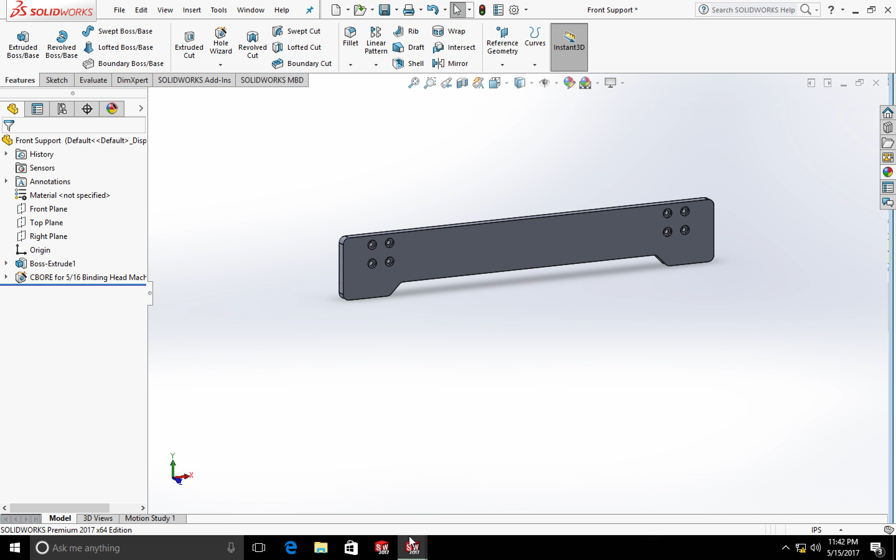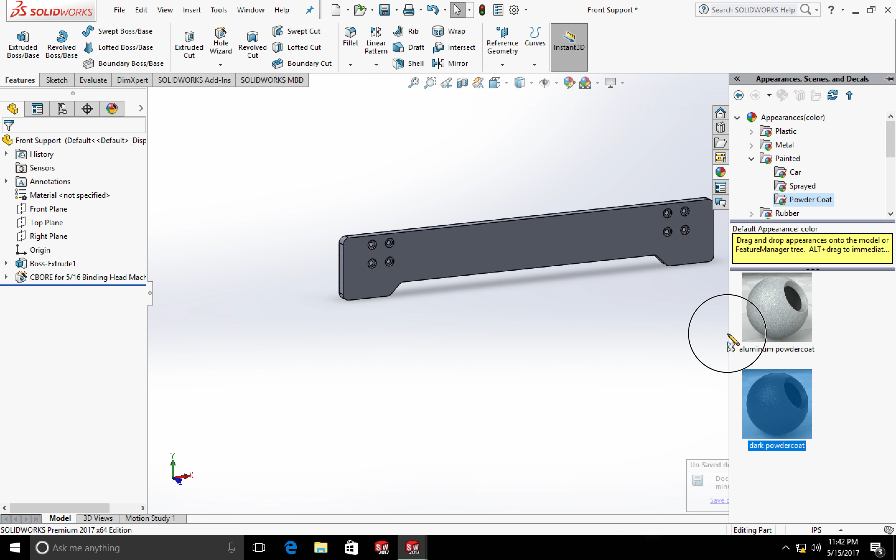Let's see here, so we're going to go with a painted look. And we're going to give it kind of a powder coat look. But if I give it like a dark powder coat finish, and then go in here, I can actually edit it. Yeah, and we can give it a nice, cool color, red, like a sports car. There we are.

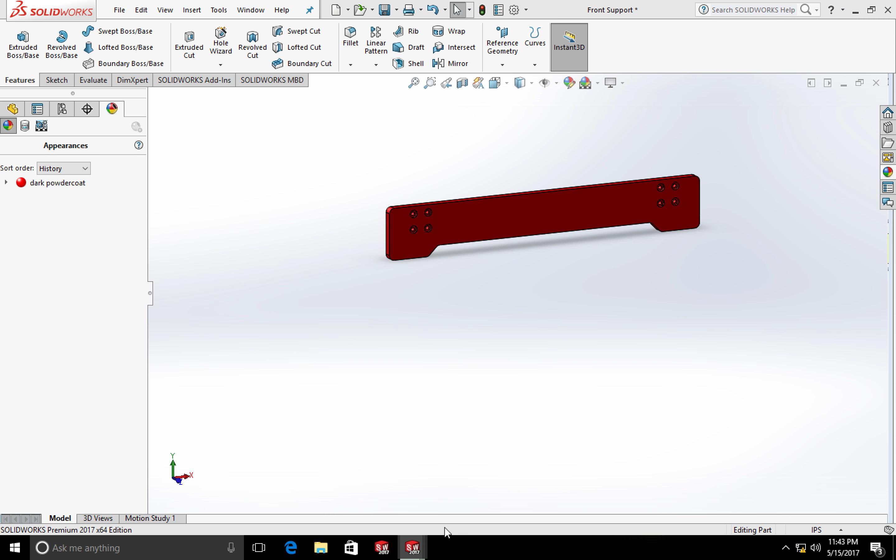So just like that, we've upgraded our styling. So there it is.

Now, so keep in mind a couple things right now before we close this out. The spacing for the hole from here to here is not dependent on the spacing for this. Now if we change that dimension right here, our spacing from these holes to these holes, that'll change, and we'll have to go through and edit it.

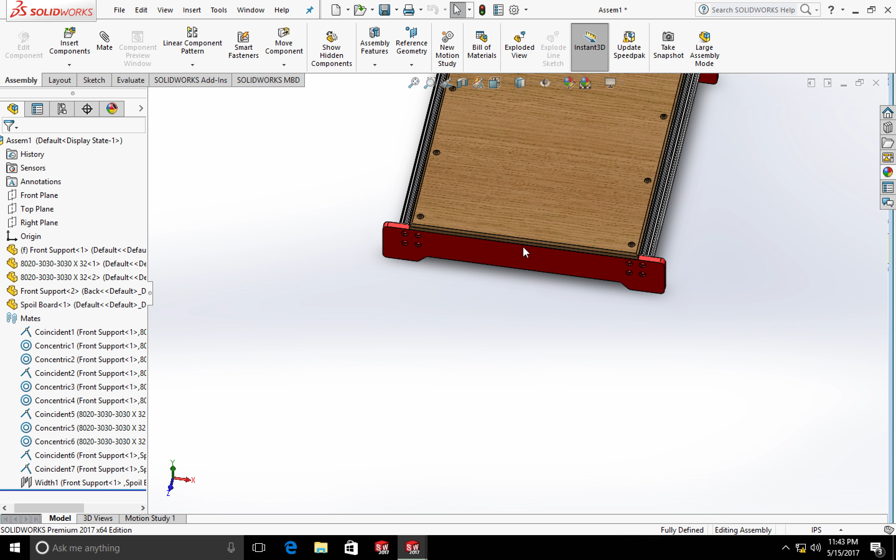I try to keep things to where you only have to edit one thing if you make a change like that. And I might go later and add a relation right there. But for now, I'm just kind of trying to be quick because I'm just trying to get the basic stuff out here. So right now I'm kind of taking some shortcuts, and then I go through and make it a little bit more official as I go. And you'll see kind of how I do that as we go on.

You'll kind of understand a little bit more about the compromises I make during the design process. Because right now I'm not shooting for perfection. Right now I'm kind of just in a hurry to get everything there and to get everything in front of me, so that way I can start going through and then fine tuning. So I'm not shooting for perfection right now, I'm just shooting to get everything pretty much out there.

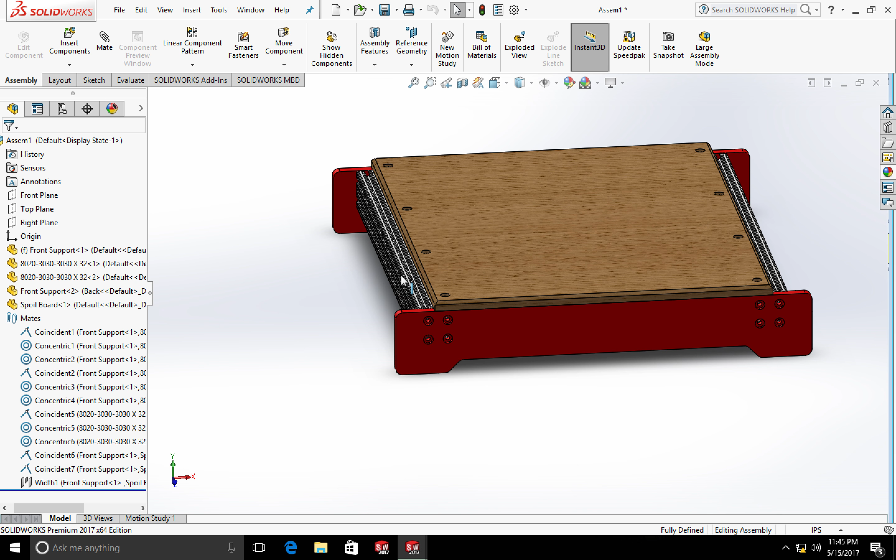So anyways, that concludes part 3. That gets us a base. Obviously, we have a lot more to go. We will get there, but so far I'm having fun. Thank you for tuning in, thank you for bearing with me, and we'll see you in the next one. Bye bye.